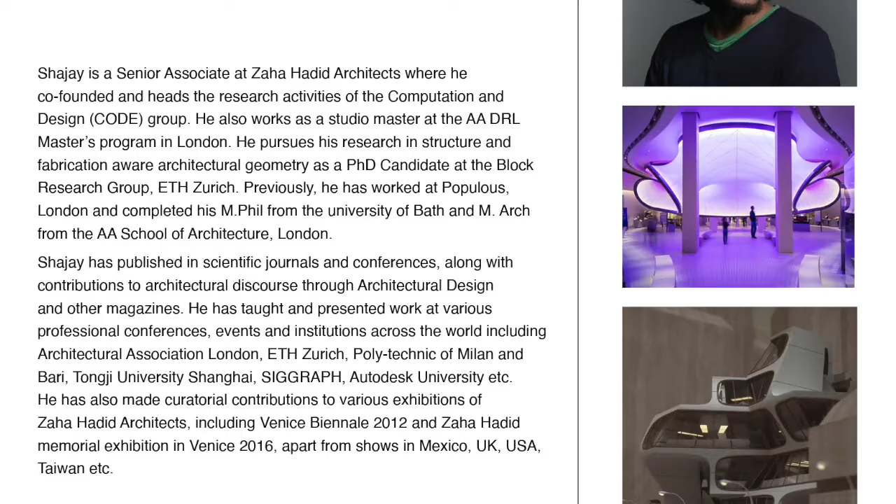Now to introduce our next speakers, multiple speakers. So one of the advantages of going to a virtual meeting actually has been that we're able to reach our speakers in a different way. And I think ZH Code, Zaha Hadid Architects, were the first to adapt to the new environment. When I was talking with Shajay about the presentation, he said, well, can I bring other team members in? And of course, that would not have been possible in the physical one with the setup that we had. So they are going to be presenting as a team.

And I think that's a perfect reflection of how we work. We work as a team. And when we have these conferences, we kind of spotlight one person in the team. We know we can't make it on our own. So it's a perfect example of how we work. We invited ZH Code because they are at the forefront of computational design. For those of you who are not familiar with what computational design means, you will become familiar after this talk.

Brad, in his presentation yesterday, touched on it as one of the drivers for the future, and how are we going to integrate that into our design process? How are we going to change how we make things, not just think about things? And how do we make it relevant to what we do? So I am very honored that they accepted our invitation and have taken it very seriously to explain what they do. I would like to welcome, I think Shajay is starting off.

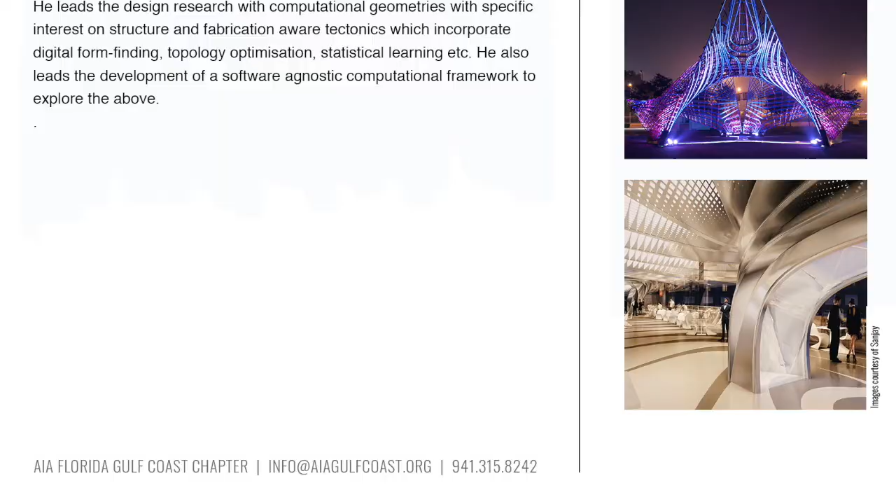Thanks a lot, Salma, for the introduction and also the invitation to speak at the conference and illustrate or outline the various efforts that are underway in the field of computational design, and how digital transformation in architecture is actually significantly underway. It's an exciting domain and also an exciting opportunity for architecture to reclaim its position as one of the leading technologically advanced professions.

And originally, when the conference was meant to be physical, we were excited to discover that Sarasota has a deep history in supporting experimentation, somewhat similar to the Bauhaus in Europe, and the Bauhaus has been a very instrumental reference for us at Zaha Hadid Architects, as you will see across the three presentations that we will make today.

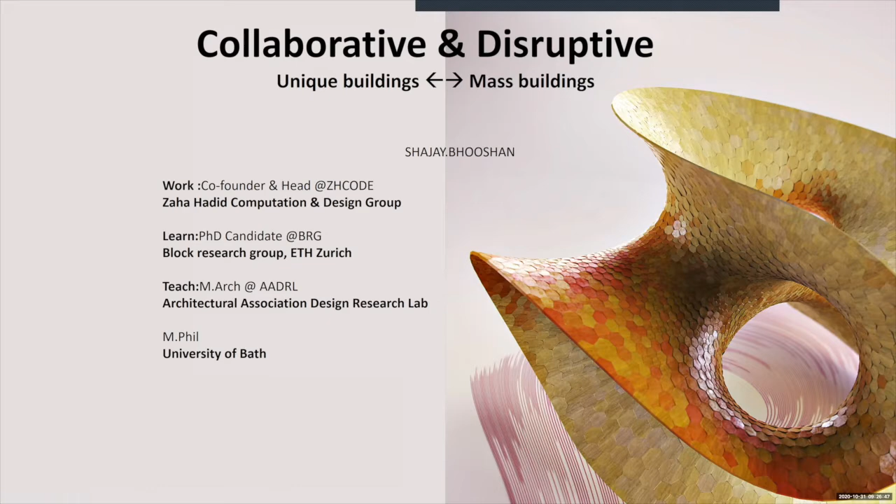So in that sense, where I work, where I learn, and where I teach has been kind of instrumental in both of these, and in trying to make this happen. And what we mean by this is to correlate research with practice, and computation and technological aspects with design.

And more graphically, what that means is, an equal part of our time is spent on exploring these fun algorithmic inventions from the world of computer graphics, from the world of computational geometry, etc., and trying to apply that to more architectural, let's say, problems like this facade design, which tries to put panels only where there's high curvature. Where things are flat, you use larger panels, for example.

And so this kind of approach helps us also automate and control quality all the way downstream. So even though it starts with a very playful experiment with maybe about 200 or 300 lines of code, it begins to yield results and fruit all the way downstream; it's trying to capture the constructional aspects ahead of time in the conception of shapes. So that's one of the applications of how computer graphics and so-called architectural geometry are intricately linked.

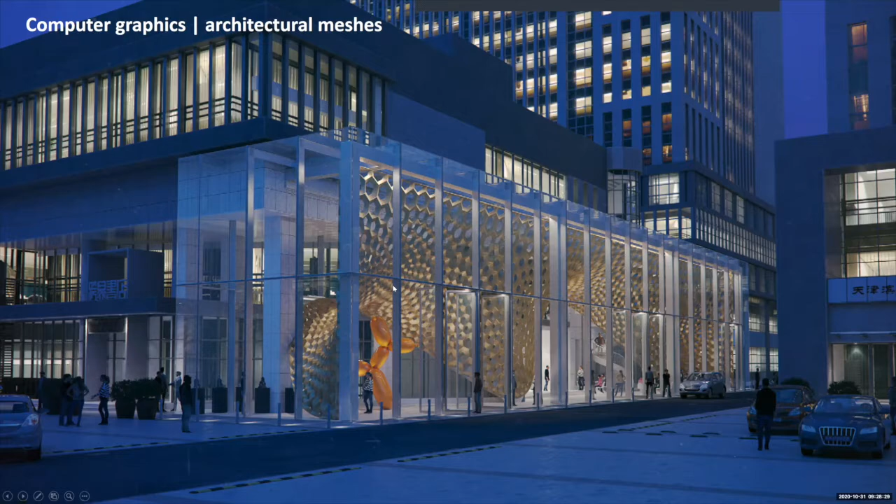And so too with robotics, which is a new domain in the field of architecture, maybe 15 years of keen interest, of trying to apply industrial robots from the automobile industry into the construction industry.

And so again, we start with simple experiments like this $25 robot, trying to instruct that and subsequently scale it to a slightly bigger robot, and then start designing a proper pen holder, and subsequently these things get more complex, and that allows us to scale to the point that we were then able to design specifically for robotic cutting.

And so all the geometries that you see here were produced by the robots at the back, and the shapes here, again, Henry and Vishu will articulate this in far greater detail. It's more that there is a direct correlation between the capacities of the robot and this geometry. So these shapes are not willfully drawn, but they're drawn specifically to match the constraints of what the robot can do. And you will see also that this significantly helps reduce manufacturing time and saves material and so on.

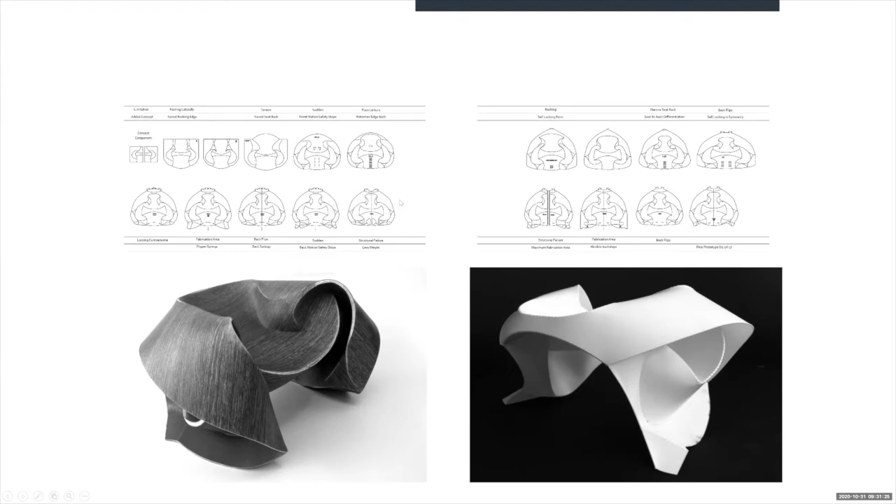And the other interesting thing about such topics is that there is a design method which is directly related to the method of making the object. So here we draw the patterns in 2D. We discover fold lines and draw them, and subsequently only fold them into this 3D shape. So the entire shape is made of one singular piece of paper in this case. So there's no gluing, joining, or any. So this shape will unfold into this singular piece of paper.

And what can be done in paper can also be scaled. This is another key principle of all of these experiments: similar to the robots, what you can do with a small robot, you can scale up. And similarly, what you can do with paper, you can scale to other sheet materials, which we did here. And anecdotally, what's interesting about this is that this was produced in India with hardly any digital economy at the time.

And it was also produced in just a few hours by folding metal by hand. We then subsequently tried to capture these intuitive aspects digitally. Until then, the whole design process was a physical process: just fold paper, draw on paper, and fold, etc.

And somewhere alongside, we were also scaling, making very large scale installations like this one for the Venice Biennale, which was not folded by hand, but folded by robots. But most of the intelligence was in the geometry. So the robots were themselves just automating some of the tasks.

And we bring a similar kind of thinking when we are thinking about new technologies such as 3D printing. In fact, as part of my PhD, I'm trying to explore the relationship between unreinforced masonry and 3D printing in concrete. And this analogy goes beyond the visual analogy. It goes far deeper, because masonry is compression dominant, meaning there is no steel or tensile capacity, and it's also orthotropic, meaning that you can shear away along these layers.

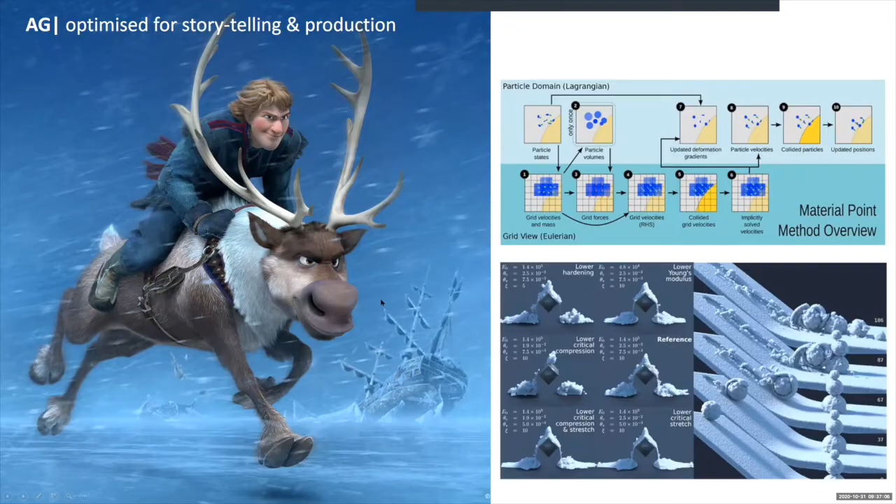Whereas behind the scenes, there are several PhDs worth of technology on how to simulate the snow, how to simulate the fur, and even how to simulate lighting and so on. So this kind of synergy between storytelling and technology, where technology really takes a backseat but is enabling the storytelling, is what we are really after. And again, even in the built environment, this is not very new.

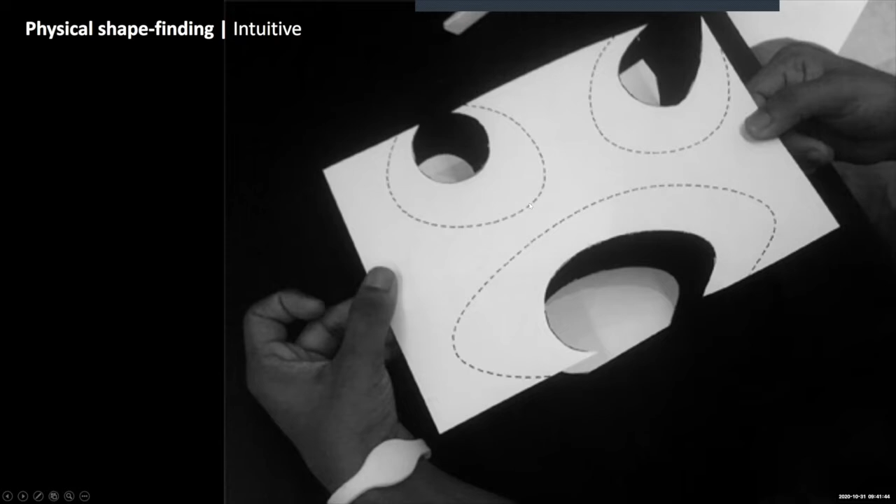More specifically, what we mean by architectural geometry is that physical and machine parameters are abstracted as geometric properties. Back to the origami example, in origami you cut material and score the paper, and then you fold by hand, and you get curvature for free, and the shape is an automatic result of the physical action. So this is a phenomenon of physics, where you're bending paper.

But when you try to do that on the computer, rather than recreate the physics, you try to capture the geometrical properties. In the flat plane, two conditions are true. All these squares and triangles will be flat, and also the angles at each of those so-called vertices, if you add them up, will add up to 360 degrees. So if you incorporate these two aspects, you make sure that things are foldable. The physics aspect is converted into two geometric properties, one of angles and the other of planarity.

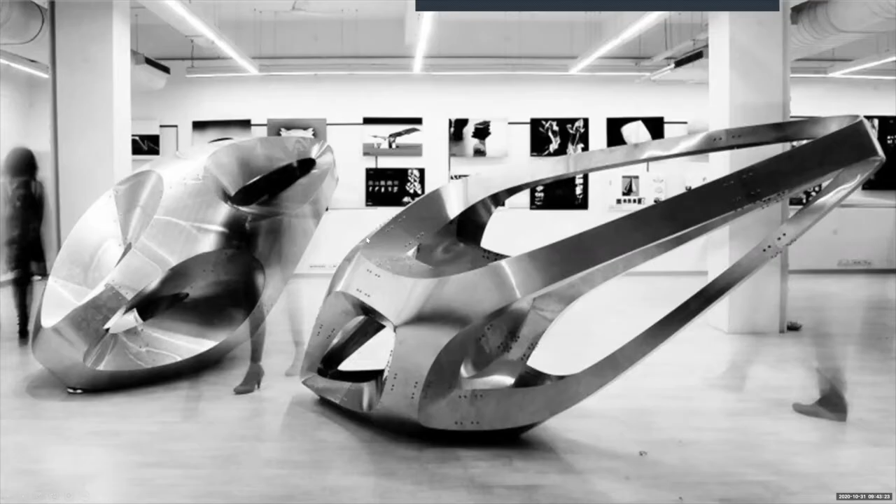And we move the points until such conditions are true. So you can see at the bottom that when the conditions are met, this particular shape is actually foldable. The benefits of making shapes foldable, for use as formwork and so on, you will see in Henry and Vishu's presentation. But in this case, we just made sculptures.

Again, without needing anything more than a simple laser cutter, which was available in India, because the person who had the laser cutting machine was using it to cut license plates. So we made a deal with that person. We exchanged some computational knowledge which would make their life easier, and they cut this for a cheaper price. And we were able to assemble these in a matter of a few hours in a relatively low-tech economy.

So architectural geometry, in our opinion, is significantly better because it captures several of these physical parameters: it's structurally, ecologically, and spatially better, and you will see how it's also helpful in the preservation of building traditions. What we mean by better is that it offers better degrees of freedom for designers. For example, in this tight space, we can create far more user experiences than if we were restricted to straight lines. We can create a somber mood on one side of this section and a more open mood, ambience and user experience on the other side.

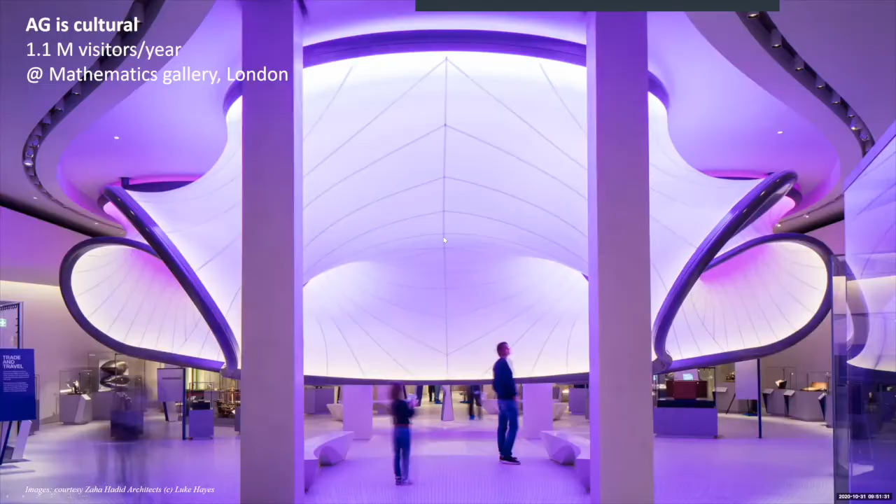And we have tried to extend this logic to schools in rural China, where we are using a different masonry technique, a different historic technique of stone vaulting, and trying to create various types of school spaces, like classes for primary, smaller children, larger, bigger children, aggregation spaces, and each one of them is kind of notated through the use of these textures and the size of the vault, etc.

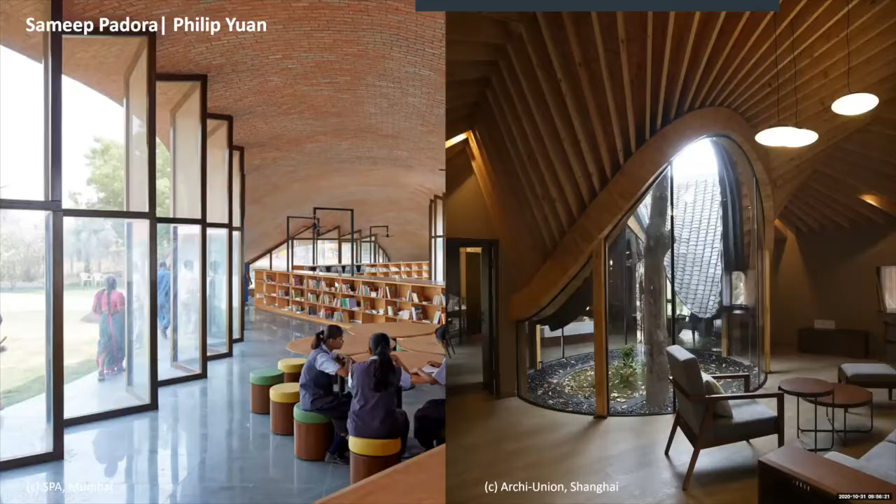But at the same time, similar logics are beginning to see extensive use in other building economies, like our colleague in India, Sameep Padora. He's been using similar techniques of stone, brick vaulting, etc., to design this library / school, which has sustainable benefits. It provides cooling, self-shading, because curvature is beneficial to have self-shading, given that 100% of the surface is never fully exposed to the sun. So some part of it is always under the shadow.

And similarly, Philip Yuan in China is producing these very intricate mixes between modern day robotic construction technologies of cutting timber, combining it with more traditional spatial motifs and also constructional techniques of shingling and so on. And what's interesting about Philip Yuan is that alongside Archi Union, which is his company, he also built Fab Union, which is a construction company which imports and develops robotic construction technology. So that's an interesting growth to see. They started small, and right now they're building very large hotels, etc.

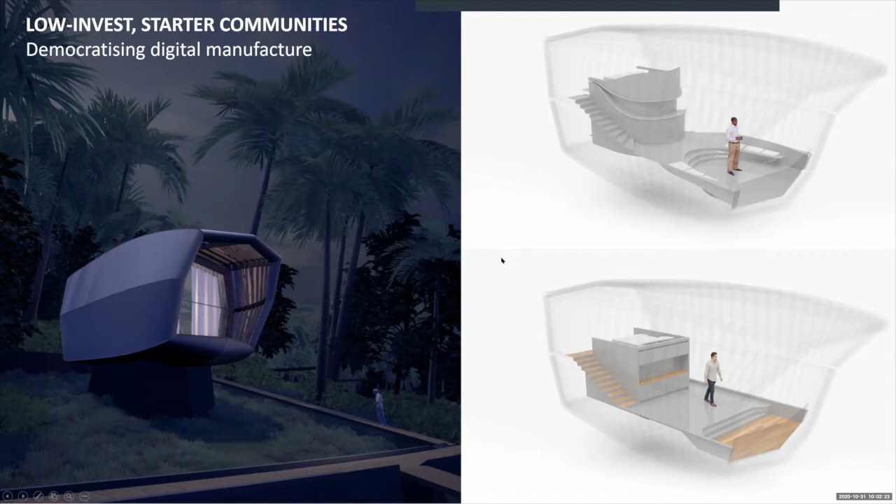Yeah, and then it also provides customization opportunities, right? So customization comes for free. Whether it's the top right image or the bottom right image, it probably consumes the same amount of machine time.

And other scale-up businesses, like this 3D printing sculpture that we had done with a London business called Ai Build, they're now a serious startup receiving investment from large companies. So they are making these technologies available to the extent that you can literally send a part over the internet and they can give you a price and ship it to you. That's what they're trying to do with this mold making technology. So you send a file, they will give you a quote, and you can order it literally over the internet.

And as I was saying, at least we are aware of these two big institutes in Europe. Presumably there are several others in the US and elsewhere investing significant amounts of human intellect, but also financial backing, into taking these new technologies that were experimented with in the last decade mainstream.

One example with ETH Zurich is this formwork technology, a lost formwork technology that we worked with them on to build this concrete shell called Knit Candela, as a homage to Felix Candela and his geometries. Again, Vishu will talk about these in greater detail. But what was interesting was that the entire formwork was knitted in Zurich and weighed only 55 kilos, and it was sent on a commercial flight as cabin luggage, and then subsequently hoisted, pulled over and tensioned, and then concrete was cast onto it. From start to finish, it was only 2.5 months.

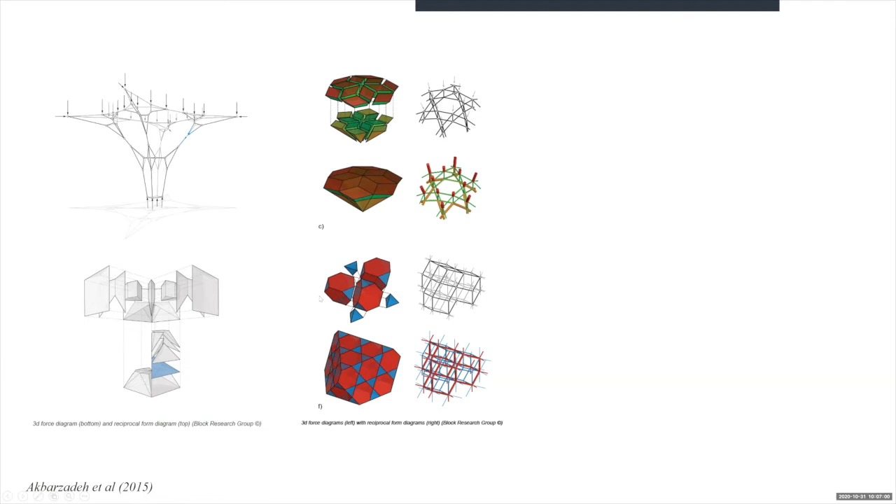So this piece of research literally unearthed theorems from James Maxwell in the 19th century and kind of upgraded that to understand the structural stability of these kind of skeletal structures, amongst other things. And what we found at ZHA Code in our research was that that structurally meaningful principle can be extended to also have some constructional information.

So for example, all of these complex joints can be made from flat timber sheets and flat metal sheets just by bending these hexagons. And again, these are just geometric principles that allow for not only structurally meaningful, structurally performing shapes, but also ensure that these can be manufactured or constructed using flat sheet material like this.

So the property helps that you can bend a sheet of ply, and then make very lightweight kind of formwork at least. And it also allows for a spatial extension, considering the spatial effects of these. So there is a lot of effort needed: you have to experiment design-wise, you have to experiment physical prototyping-wise, and you have to experiment in acquisition of knowledge.

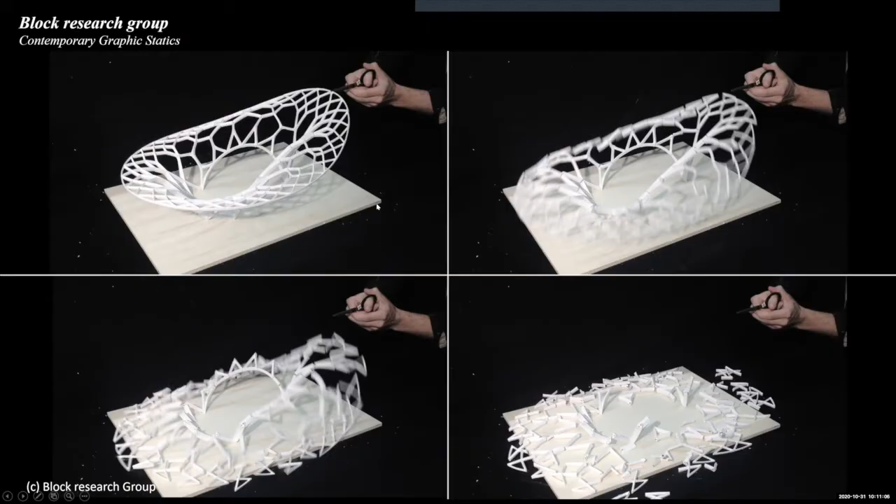Not only draw this, but also 3D print it, assemble the model and make it stable through the use of this red string. So there's no glue involved, right? So you cut that string and everything is going to come down. So how do you draw the geometry such that they're in this kind of structural balance? That was Philippe's PhD, which students were able to acquire in a matter of a week. And we were also then subsequently able to incorporate some of the findings from the workshop back into our software.

And now we are trying to extend those kinds of shapes through our own models, 3D print them, and you can see the cable there, not yet working. But we also physically made one such partial prototype, and eventually when it's complete, it should be something like that. So again, held together by a tension tie, everything else in compression.

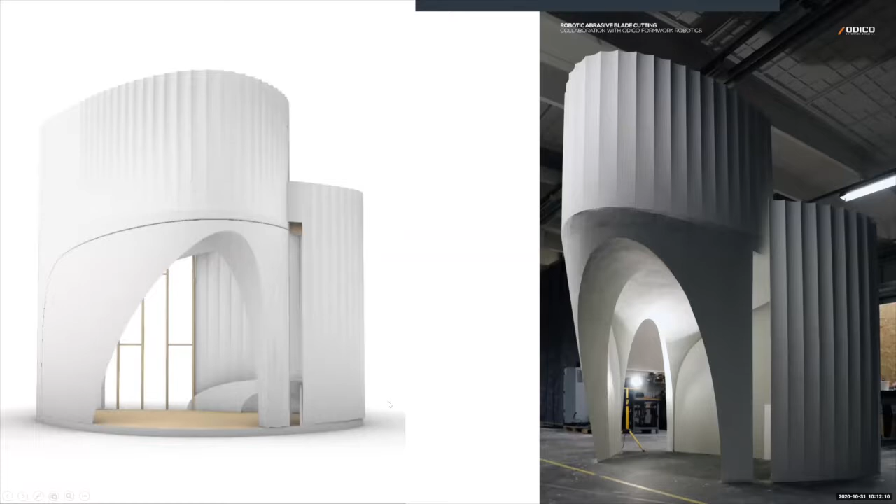So things are getting cheaper digitally, physically, and to the extent that students, in this kind of stakeholder participation game, were able to incorporate these kinds of novel geometries, which can be hot wire cut. Again, using these hot wire cut technologies, they were able to acquire the necessary knowledge to create the shape on the left, but also go to the factory, just 3 students, work with the robots and construct this proof of concept in a matter of 3 weeks.

So I will end there and leave it to Henry and Vishu to give you far greater details on how these are applied. But I would like to just end with this idea that architectural geometry, which is upgrading knowledge from several centuries ago through the use of computer graphics, computer geometry, computational technologies, is actually much better, and it is getting cheaper and becoming mainstream. So it's better structurally, it's better ecologically, it's better spatially,

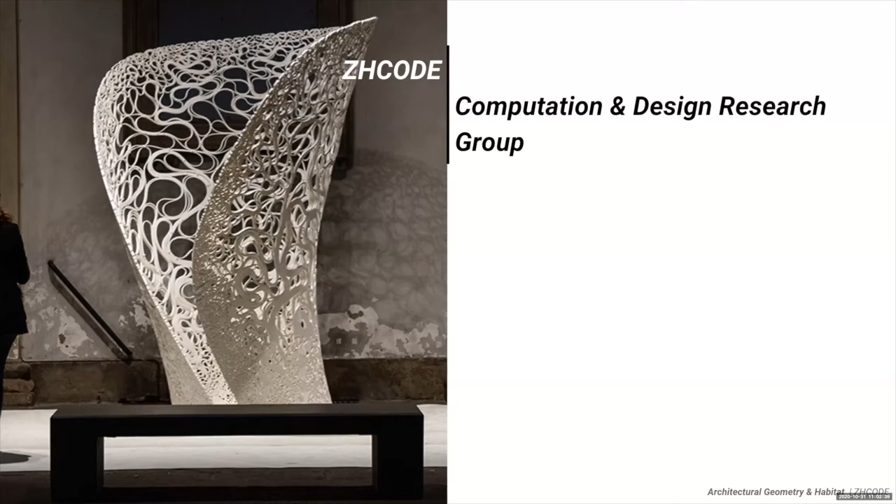Brief introduction into the group. ZH Code is Zaha Hadid Computation and Design Research Group. It was founded in 2007 by Shajay and Patrick Schumacher and Nils Fischer. In its existence over 13 years, since 2007, it aimed to create interdisciplinary collaborations through technology demonstrators, and subsequently getting more and more involved in projects.

Another mandate of the group was to have a wide range of collaborators we can call upon for different things, varying from 3D printing and robotics, data and machine learning, creative coding, manufacturing, engineering, etc., whilst also developing our associations with institutes such as Block Research Group and the Architectural Association, which Shajay already mentioned in his presentation. More recently, since 2018, we have an association at the Bartlett, and through visiting schools, we also develop networks in India, Mexico, China, etc.

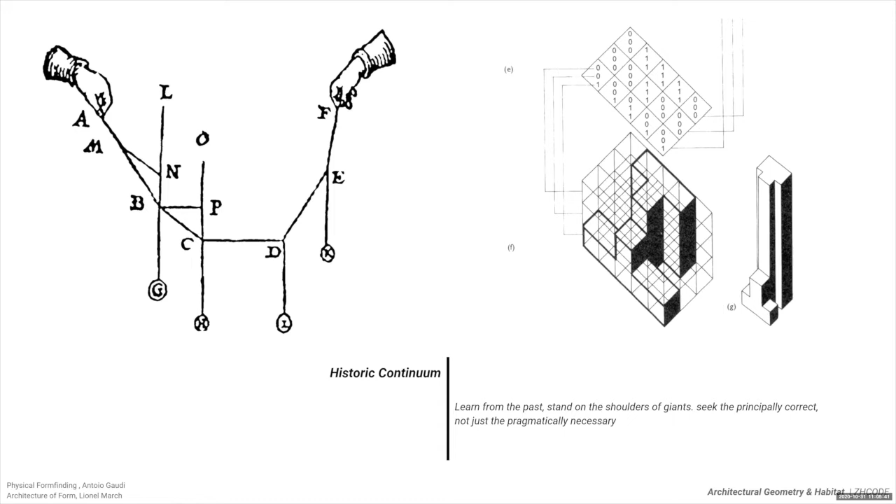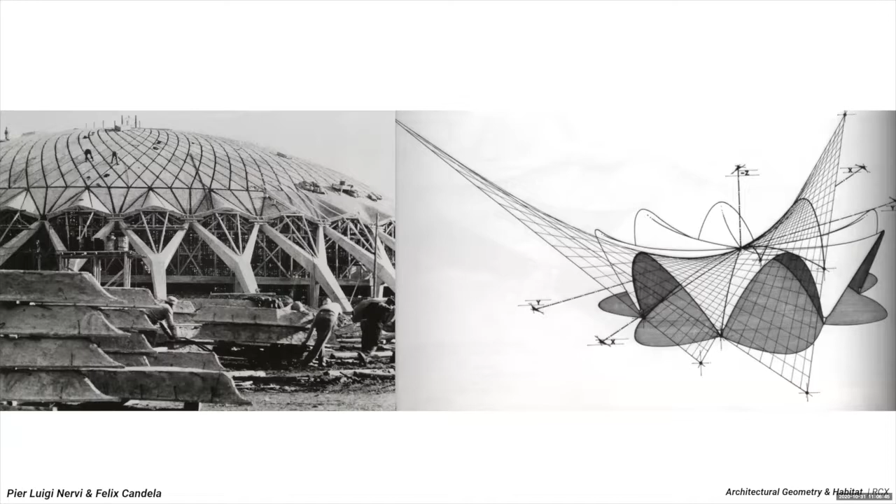And also other architect engineers such as Felix Candela on the right, who focused most of his entire work on a particular geometry called hyperbolic paraboloids, a specific subset of ruled surfaces. And Pier Luigi Nervi on the left here, bringing in not only geometry, but also rationality of construction and statics into the mix.

So learning from these historic figures, combined with maturing computation tool sets in the architectural industry through the Architectural Geometry book by Helmut Pottmann or computational statics frameworks by Block Research Group, Axel Kilian, etc., combined with other computational frameworks developed by geometry groups, again in TU Vienna, at ETH in the Interactive Geometry Lab, Keenan Crane at Carnegie Mellon, has matured the computational framework to bring it closer.

So we are now able to express statics, fabrication related constraints, environment constraints, and early stage shape design. And that is what is called architectural geometry, to make it visible in shape, structure, fabrication, and more recently, other performance factors like environmental performance, solar data, etc., into the shape design and influencing it.

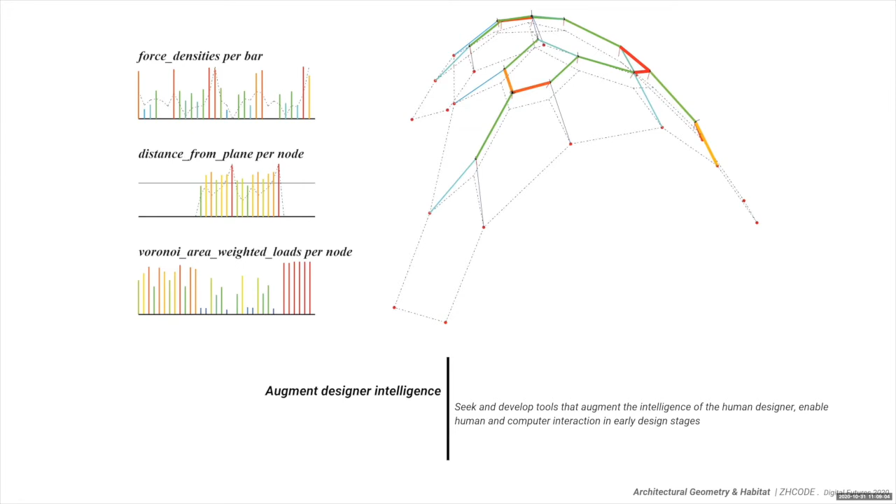The goal of the research in architectural geometry is to augment designer intelligence. It's not to replace the human, but to augment the human intelligence with these tool sets, so you're making an informed decision.

The first part of it is learning by doing, so the academic setup, how we carry out our research in an academic world. As previously mentioned, we have academic collaboration at the DRL and at the Bartlett, in the architectural computation as well as architectural design courses there. We have done 40 plus workshops over the years, where we try out different things in each of these workshops to develop our understanding in research of geometry.

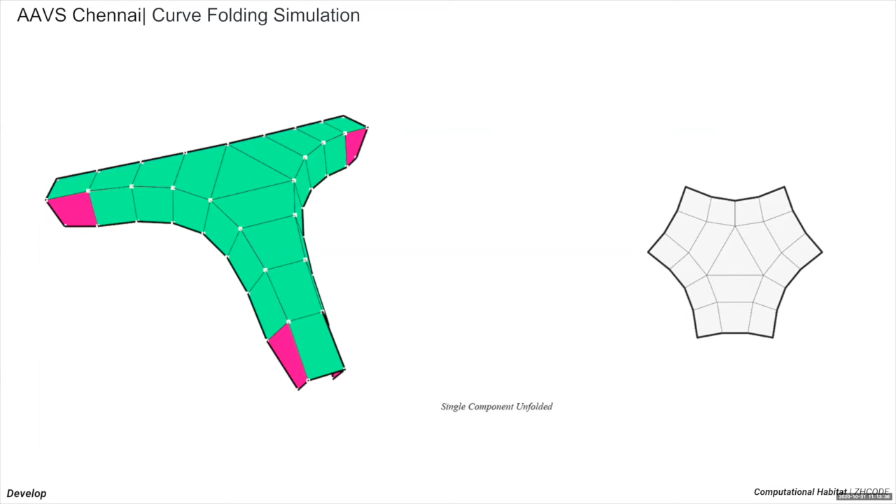So this is one of the ways that we also interface with the group, and also the rest of the office. There was a question about how design technology is transferred to the rest of the office: it is by transfer of these tool sets and the computational knowledge behind it.

So one is to understand the computational tool sets available out there to recreate this. And that's also part of the research through our teachings. We tried to get students to look for these papers and understand the technology behind it, and then use it in early stage design.

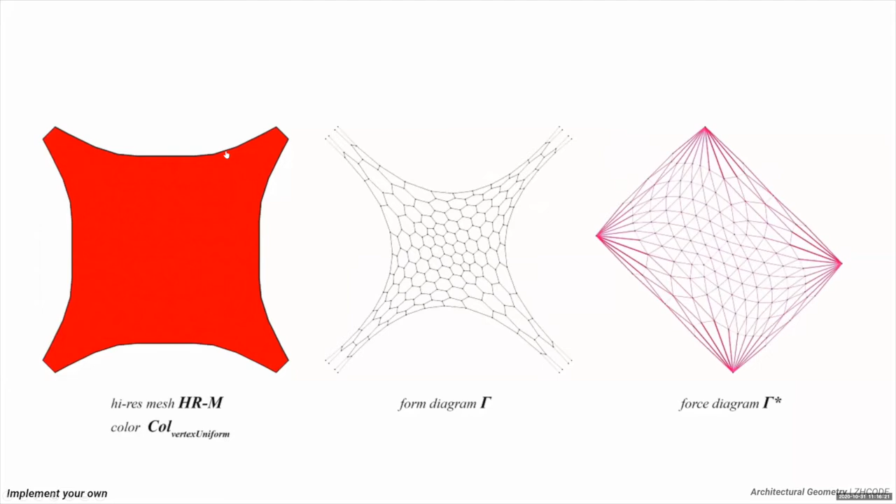So this is exploring the same idea of form and force diagrams, but in this case also inputting a designer constraint of, if I change the input geometry, how does the form and force diagram change, or developing an understanding of that. Once you have this understanding, you can build up the tool sets to integrate it into the designer environment. The office uses quite a lot of Maya.

So we try to integrate our tool sets in Maya so that the designers can interact with it and develop geometries, in this case funicular shapes, which are in compression, and developing an understanding between forces and the resultant geometrical shapes.

So once you have the tool sets, the next step is to use it in the design domain, try to build up structures. This was explored in a collaborative workshop with Block Research Group in Shanghai, where students were exploring polygonal modeling combined with graphic statics or thrust network analysis to build up geometries, and then subdividing them into panels or small blocks, which all stand through friction. And this is an example of one of them, trying to do a spiral staircase.

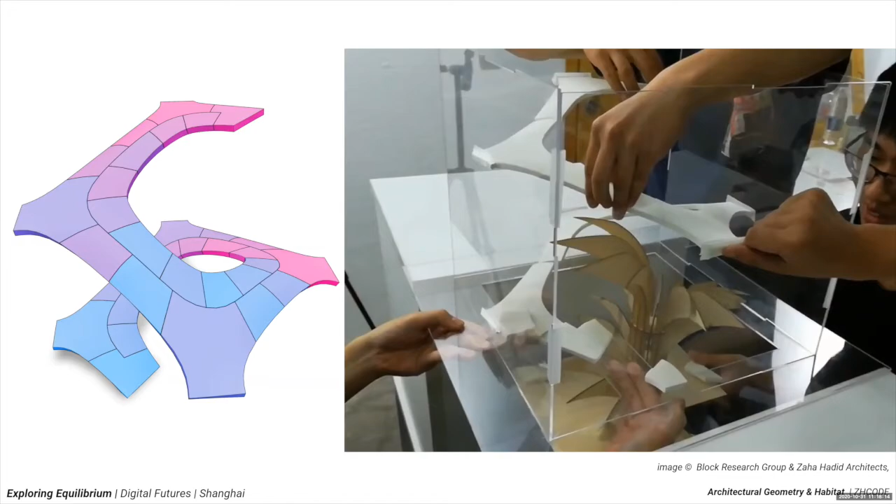The same logic applies to this geometry here as well. The whole structure is held together by this tension ring, which is a pink string on the top. If you cut it, all of it would collapse, like you saw in the previous video where the staircase collapsed while they were removing the scaffold. So these are the understandings we want to build through research and also inculcate into students to explore the design domain given by such a tool.

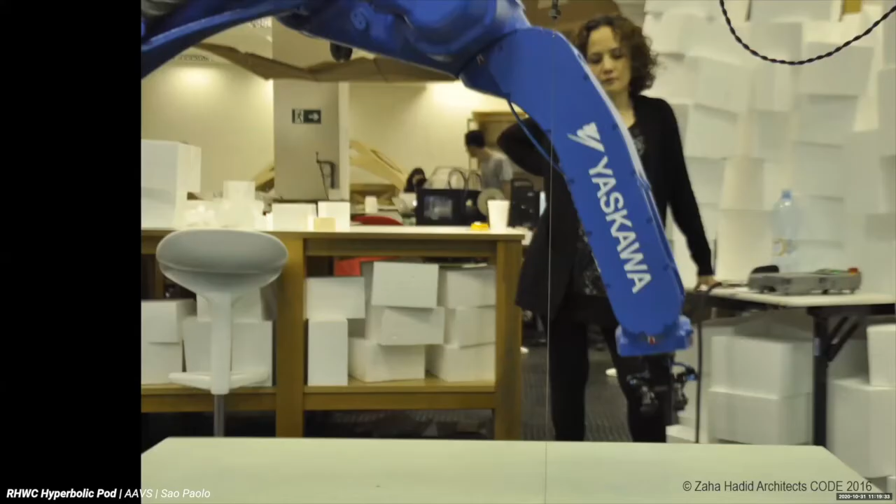Why is it needed to be planar? Because we wanted to make it out of hot wire cut foam blocks, which are easy to cut. So as you can see here, because all of them are planar cuts, you can just pass the foam through a string of hot wire and the block is made. And as you can see, this is almost real time. Each block takes about a minute or two to make. The overall structure had about 160 blocks, which were all produced in 3 to 4 hours of time.

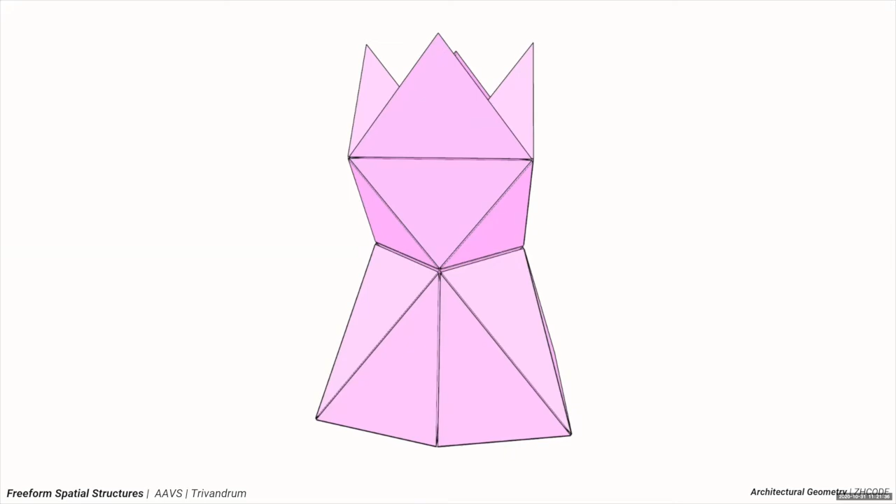Again, this has a structural influence from what is known as graphic statics. The shape is in compression, but our research here was to bring in fabricational rationality and explore the design domain provided by that. This was produced in India, where at that given time there was no laser cutter. So we had to adapt it to the local fabrication tech we had there. So a laser cutter was here replaced by 3 humans mapping out the cutting platform, one of them drawing the shape of the profile and then cutting it.

So there are tolerance issues. This is picked up in how it was assembled, because there was no labor involved. It was all students putting this together. The geometry, because it was bent metal, would take up the tolerance while we were building it up. And also the tolerance of fabrication was input into the design itself. So the metal, because it was going to be produced by humans, was scaled down a bit so we could adapt to that tolerance while constructing.

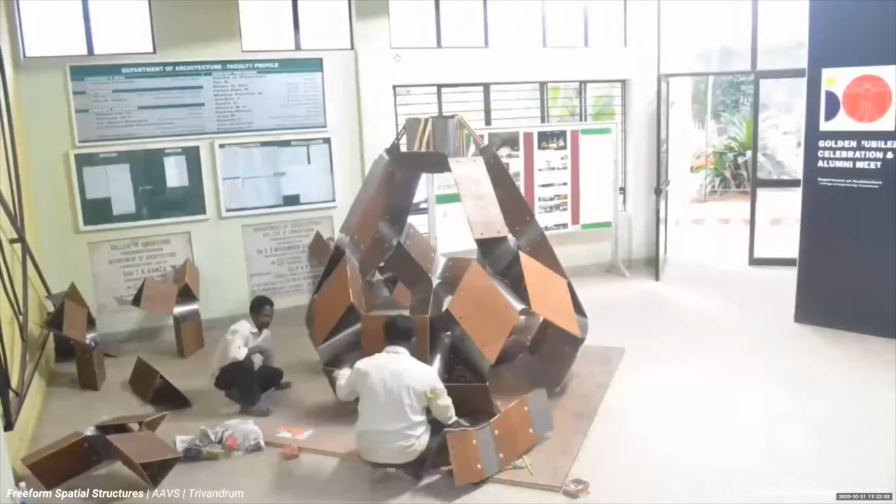Exploring the same logic further, in this case, we got rid of the metal connectors and built purely out of bent wood, exploring the same strategy of unrolling a given geometry into flat sheets, which can be laser cut. So you can see all the sheets unrolling into flat sheets. And in this case, because it was all made of timber, we had to explore a new connection logic of these kind of teeth connectors.

And this was the sequence of production. So you have a CNC cutting the profiles. They were then put in water to give the curvature needed to bend, and then we assemble one of the nodes. As you can see, it is quite light, and then locking them together with human winding and locking it together in place.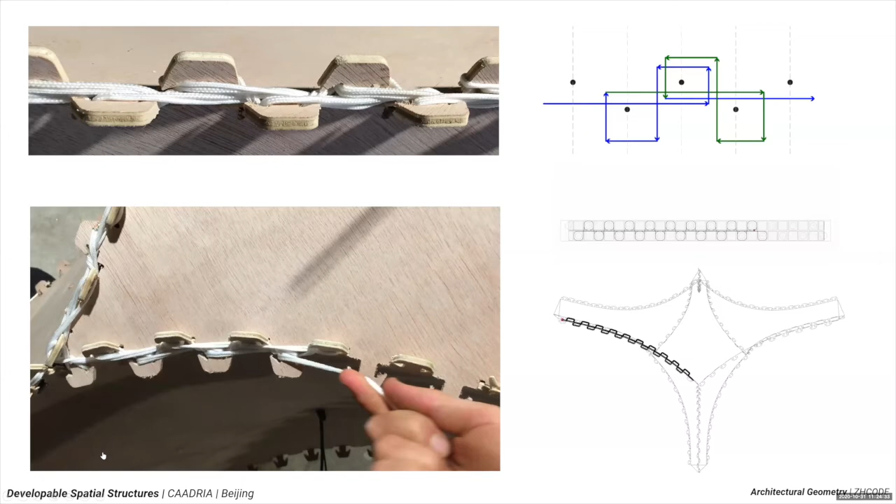This is another research domain we were exploring. We wanted to do this using robots, but to understand the logic of it, that's why you're seeing on the video on the left here that it was done by hand. So just to try to replicate what the robot would be needed to do to understand the logic and the sequence of this winding, and then subsequently develop the tool sets on the right.

So the digital representation when the workshop was done wasn't existing. It was done manually to understand the process, and then subsequently developing a computational tool set to explore it, and then eventually to try and make it with a robot.

Previously, we also mentioned a bit on the curve crease folding. This is applying that in a larger domain, in this case, a compressive shell. If it works on one Y module, as previously shown, it can work on an assembly of multiple panels. You're just scaling the computational time, but the logic remains the same. And as you can see, when everything becomes green, all of it can unroll into flat sheets. And that is how it was produced.

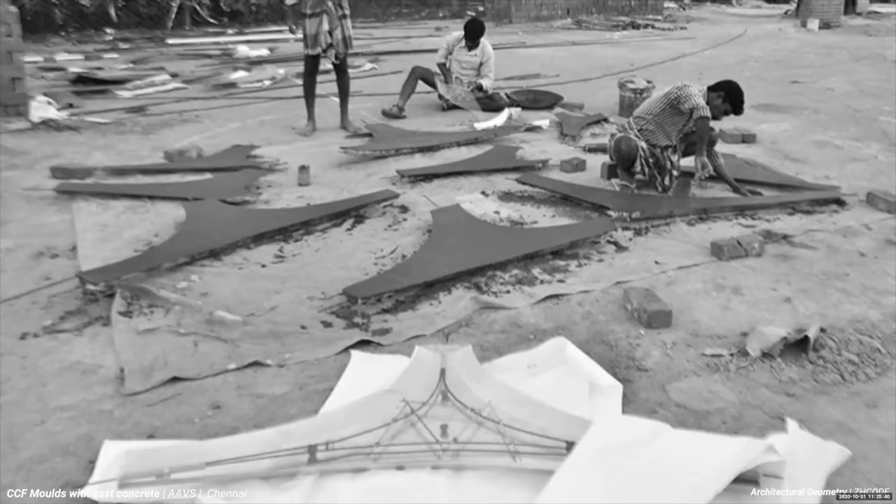So you unroll them, you cut, in this case it was metal, you cut them with a laser cutter, and then you bend them back into shape. Again, all of these were explored by the students. But in this case, these molds were becoming formwork for concrete. This is where we need skilled labor. Skilled labor was used to cast concrete onto these folded molds, and then assembled on site using metal connectors between panels, as you can see on the right. This is a work in progress of the shell structure.

Similarly, as you can see, the scale of application keeps increasing. We are kind of growing as we become more and more confident with the tool sets. This is another example of a shell structure in India, and a similar one at around the same time in Mexico. Again, all of these are through 10 to 12-day workshops. So the construction period is also very concise and very small.

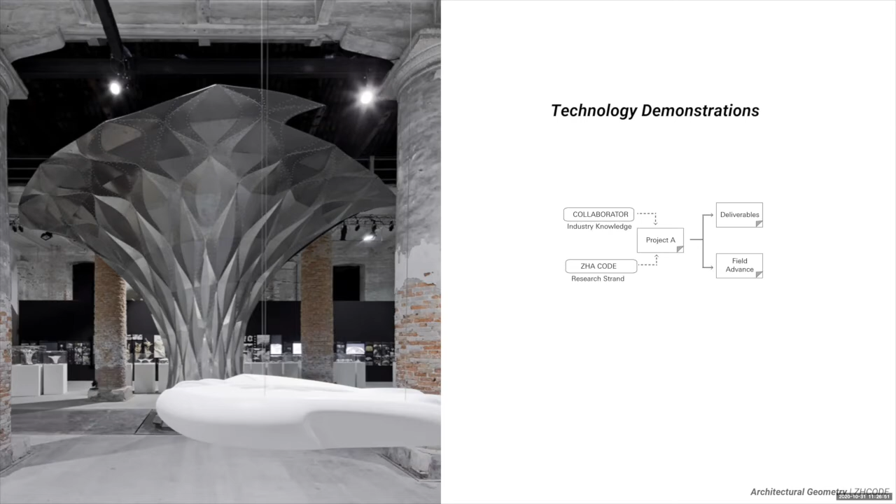This brings us to the second aspect of how we work within the group, which is to collaborate with technology collaborators. They bring in the technology, and we try to experiment through design how to explore and understand the technology. This can be through 3D printed technologies or high resolution 3D printing technologies, in this case for Stratasys. And the design domain here was for a chair. The technologies which were tested here were topology optimization in combination with high resolution 3D printing.

Again, in the scale of a chair, we were experimenting with stone, combining stone with carbon fiber. And here the material is actually performing: where stone is, the structure is predominantly in compression, and wherever you see carbon fiber, the structure is predominantly in tension. So this was in collaboration with New Fundamentals, Giuseppe and AKT, again exploring the tool sets we showed prior, like the Armadillo Vault, exploring compression tension shapes, and then highlighting them through tectonics of materials.

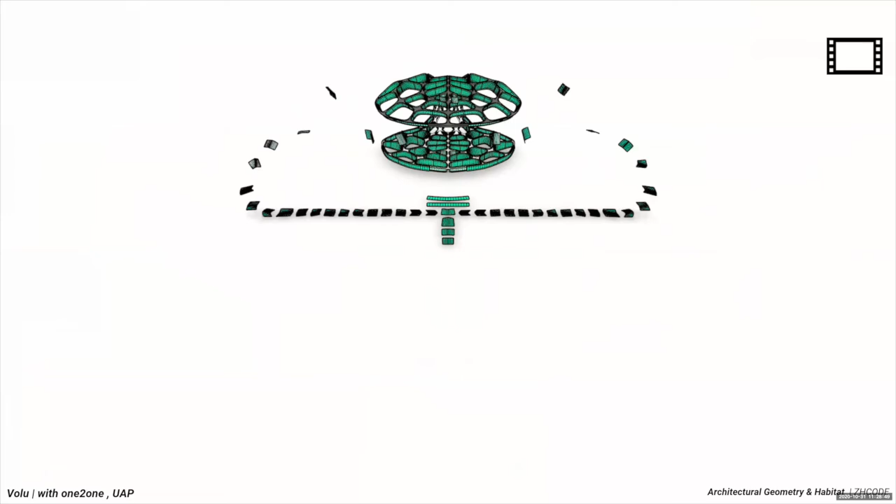Similar, another dining pavilion. Here it was a collaboration with one2one and UAP. There were two prototypes, the first one with one2one and the second with UAP. This was looking at frame structures, trying to minimize the torsion or making them planar. Again, as you can see, taking an input geometry and trying to rationalize it so that it can all be made up of developable surfaces. In this case, what we mean by developable surfaces is that it can be unrolled into flat sheets. So all of these loops, same logic as previously shown, unroll into flat sheets, so they can be cut with a laser cutter and quickly put back into shape.

This is a built prototype. This is the second version. It was a dining pavilion, exhibited in Miami Art Basel.

Another technology demonstrator, in this case in collaboration with AiBuild, a robotic 3D printing company, and Odico Formworks, who do robotic hot wire cut formworks. So because it was going to be printed with a robot, the design exploration here was differential growth of a curve, because the input to the robot eventually was going to be a curve. So we wanted to expand a single curve as much as possible in a given domain or a given shape, and a differential growth algorithm was adapted here to also correlate to structural performance.

As you can see, the density of the pattern is increased towards the boundary because that is where the high structural forces are, and the density of the pattern is reduced in the center of the geometry where there is less structural force action.

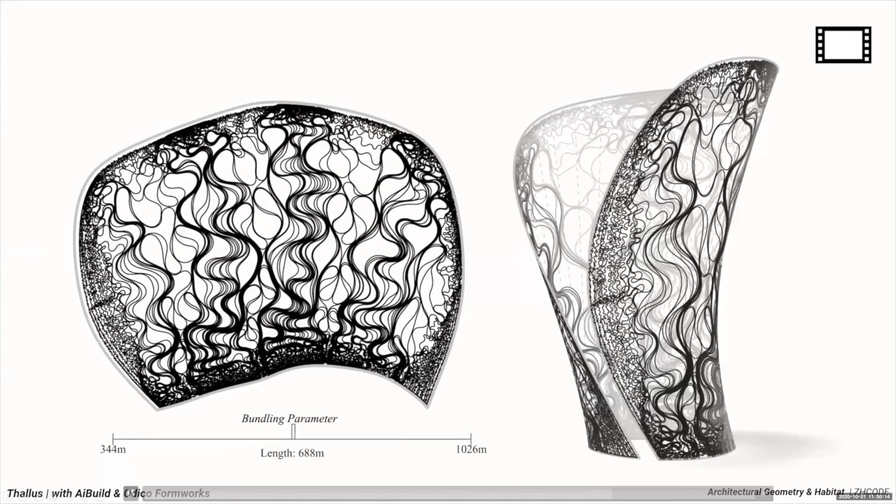Is the video repeating?

The second aspect of the project was to create the formwork on top of which the robot was going to print. The formwork here was done with hot wire cutting, and because it was a hot wire cut formwork, it had to be in the domain of what we call ruled surfaces. So in this case, if you cut a section through the geometry, it had to be made up of a line; that is a ruled surface. And then once you have the geometry in place, you can extract blocks which can be wire cut.

We have to also incorporate ideas of fabrication in here, trying to understand how the robot would print. In this case, looking at features of rotation. But as you can see, the block had to rotate multiple times. In the second instance of the pattern, it had to rotate incrementally. But eventually it was done in 3 parts. So the rotation of the robot and the formwork was slow and gradual, so the printing can adapt to it. So this was how it was printed.

And you will see in a bit the physical manifestation of it. So the formwork here is coated so that the plastic doesn't stick to it. And this is a bit of a close-up view of how the robot was printing on top of a wire cut form. So what you see on the right is the formwork, and on the left is the built prototype, which was split into 3 parts, so it could be shipped to Milan and assembled in an exhibition there.

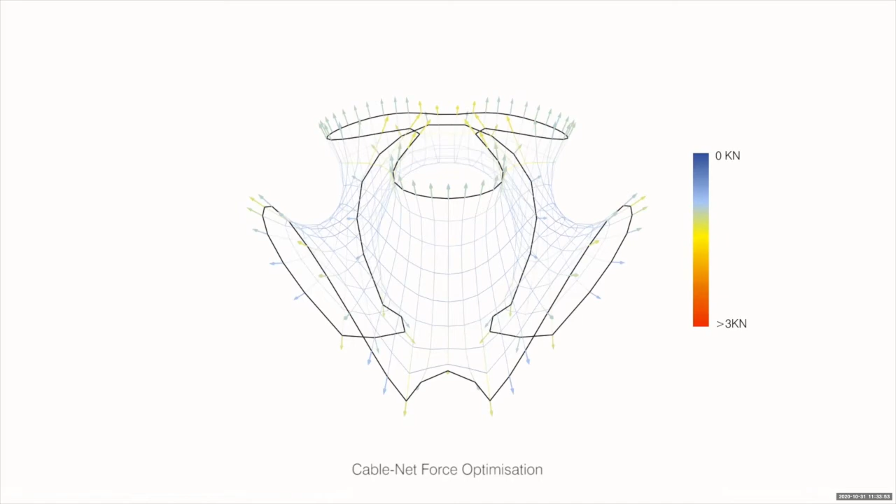So it's bringing together design technologies at Zaha Hadid Architects in London, combined with digital fabrication technologies at the Block Research Group, also inculcating structural performance into it, in combination with the artisan skills of the laborers in Mexico. So this video is highlighting how the design was developed and how the fabric, because it was fabric, had to be a minimal surface, and it was produced using a machine and the PhD project of Mariana, who was developing her PhD thesis on this fabric formwork.

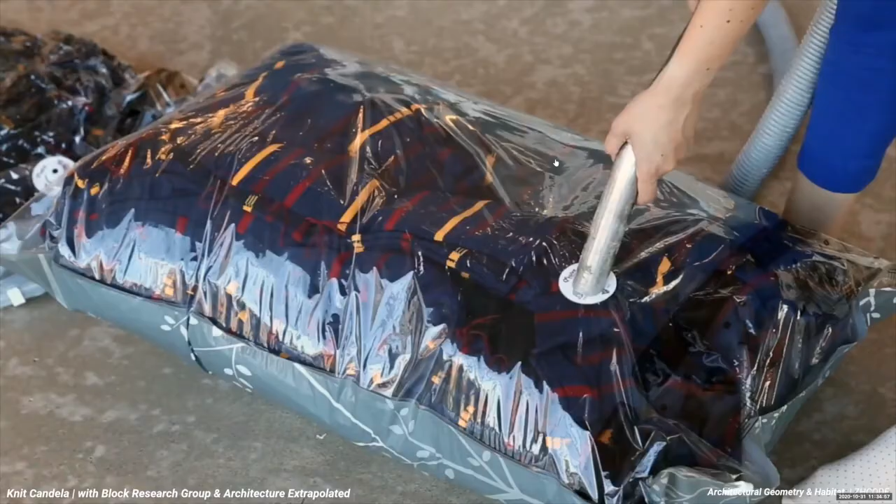The whole design to fabrication process was about 2.5 months, right from design to production. This is the machine which produced the formwork, which was packed into a backpack and shipped to Mexico. As you can see, this is Mariana on the left, and they took it in two backpacks, 55 kilos of fabric formwork, which was then unrolled and erected in Mexico.

Although, we needed a certain amount of false work just to hold the edge beams in place while we erected the fabric formwork. You can see a cable net was inserted into it to give the right tension. And you will see in a second how the whole of the fabric was pulled into shape to get the minimal surface. Just tensioning of the geometry.

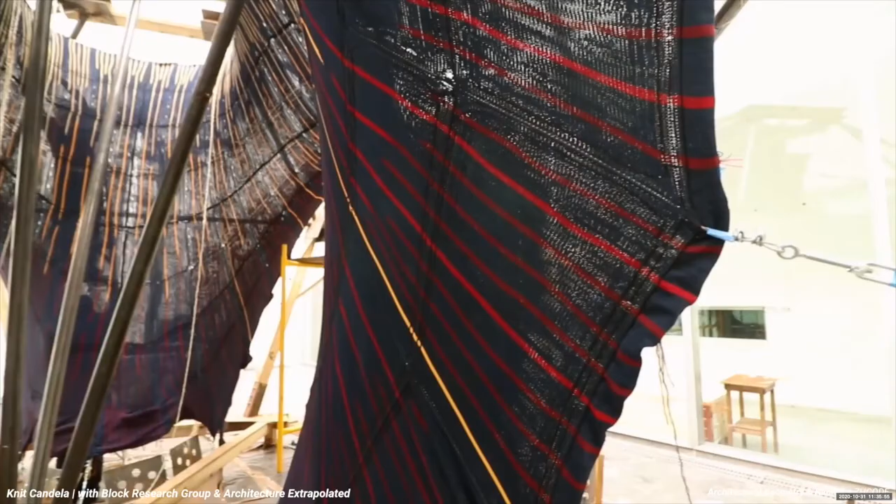There was an idea to reduce structural material as well, concrete. So in this case, there were balloons inserted in between the fabric voids, as you can see here, to reduce the weight. And then once the balloons were inserted, a special quick-setting concrete mix was used to stiffen the fabric. You can see that was the first coat, and then it was subsequently finished by the laborers and artisans in Mexico. The whole of this construction was about 1 to 2 weeks in the courtyard of MUAC in Mexico.

Some views of the technologies used in the project and the built project. In this case, the formwork is lost. It becomes an expression of the design of the sculpture here. All the lines here, the patterns, were also expressing the force lines in the geometry.

Through these technology demonstrators and our research in academia, we also are building up a computational framework, which we keep adding to. Everyone in the group has an understanding of code, and everyone also writes code. We favor first principles to understand and develop code.

So as you can see, this is Philippe Block's thrust network analysis. It gets compressed into 3 to 4 lines of code, which is exposed to the user. But to understand the first principles, each of these, you have to expand it into about 200 lines of code.

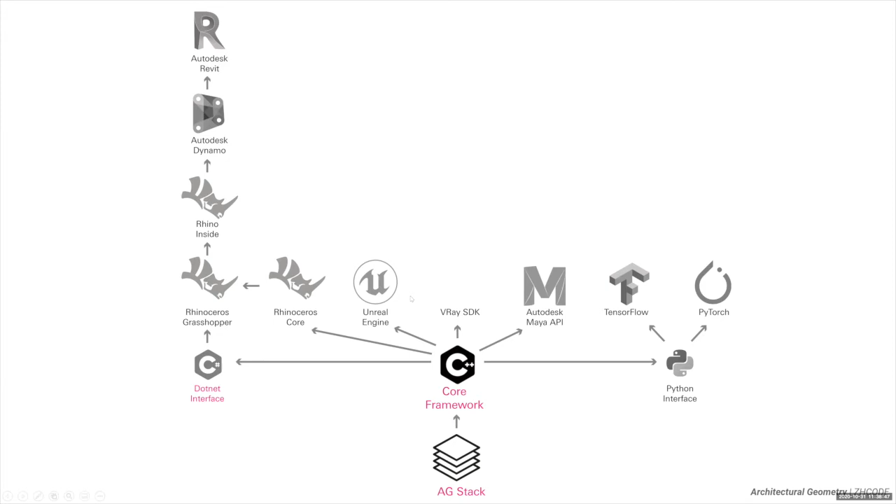Some of the tool sets, I'm not getting into detail here on fabrication. This is looking at graphic statics, and then also robots and inverse kinematic chains. So at an early design stage, you have the feedback of whether the geometry is feasible to produce with a hot wire cutter or 3D printing, etc. We also have to develop tools to interop between software, going from Maya to Rhino or Revit. So this is another aspect of the framework and technology we need to develop within the group.

More recently, we have also been looking at incorporating environmental performance, in this case, solar analysis. But as we are interested in early stage design, we want it to be very quick. Generally, these calculations take a lot of time, but we are interested in an 80% solution. That means trying to inform at an early stage with fast approximations. So you're already in a domain. While exploring design, it needs to be quick feedback.

So that's why in this case, for the solar analysis, we have adapted a tool to give quick feedback. So it's almost real time while the designer is changing or updating the geometry on the left. You're understanding what is the cumulative radiation throughout the year. These are fast approximations. It can be made more accurate in later stage design. But when you're looking at conceptual stage, even an 80% accurate model is good enough.

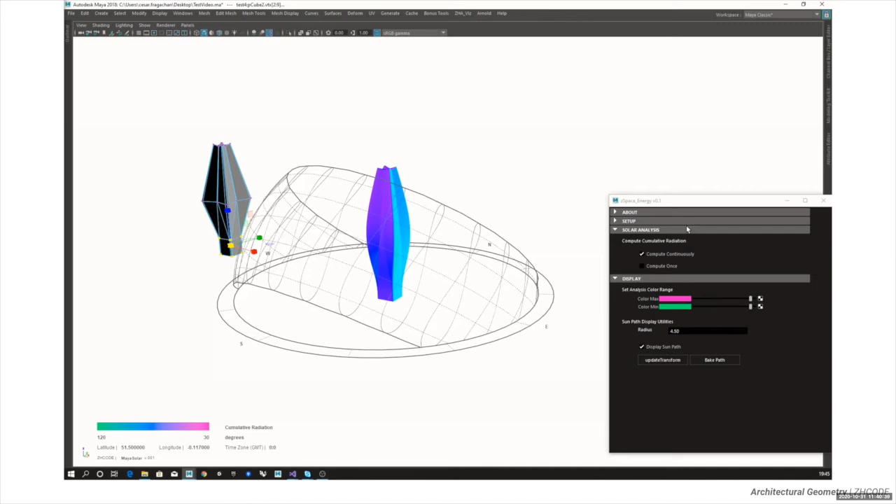Through the development of all of these computational frameworks and research in understanding of technology, we are now seeing applications of these in large-scale projects within the office, be it in museums and galleries or stadiums and arenas. We are also doing metro stations. Similar frameworks are also used in master plans, office buildings, etc. I'll give a few examples of a couple of them.

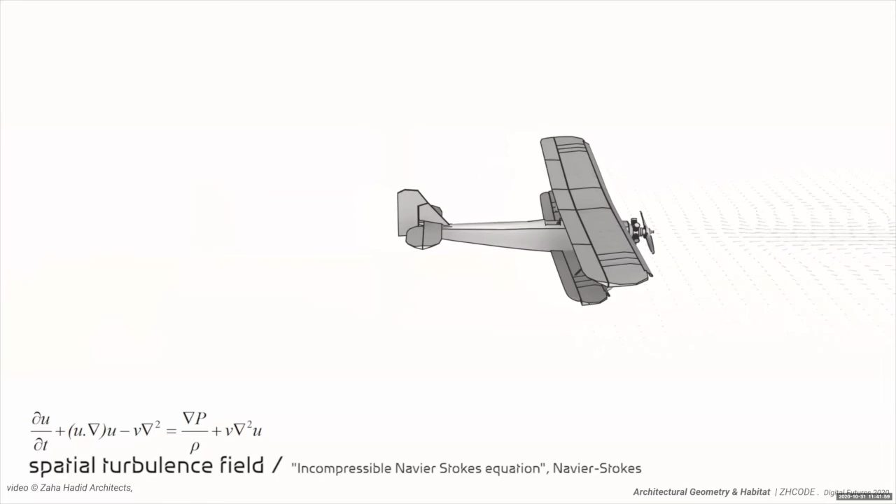This is the Mathematics Gallery at the Science Museum in London, where we were exploring the domains of lightweight structures, how to organize the space, and the robotically hot-wire cut concrete benches. So the concept of the gallery, based on understanding from the curator, was to place this Handley Page aircraft in the center of the gallery. So we were using simulations of airflow around it to be the guiding principle for the gallery. So all the objects, all the circulation and space planning was based around this flow field you're seeing in pink here.

You can see the first step was to develop a curatorial set in conjunction with the curator, who wanted to showcase application of mathematics in day-to-day life. And he wanted to explain it through stories. Each line is a story here, and each line has about 10 to 12 objects. As it was a collaborative setup, the object list kept changing over the period, and we had to set up a computational tool set which adapted to the changing object list and the changing location of stories.

As you can see through this animation, the stories kept changing, the location in the gallery kept changing. So it had to be a flexible way. We needed to come up with a tool set which allowed for that flexibility. The central piece, which was initially trying to capture the flow field behind the plane, was a minimal surface. Again, here extending the design history of Frei Otto's soap bubble experiments, physical form finding, but now through computational tools.

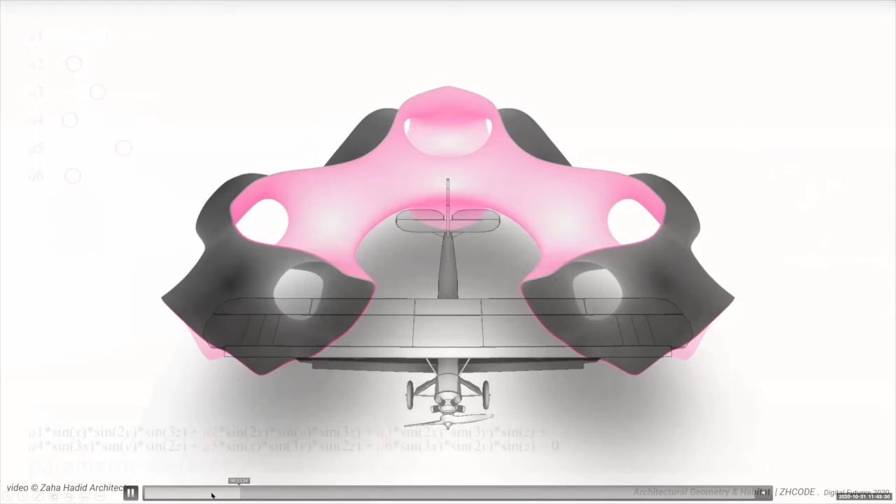Using the computational method, you can try. First, we were exploring minimal surface, which was given by equation, and then subsequently rationalized to be actually built with fabric and edge pipe, which was made up of metal. So these were some of the tool sets which were developed for the project. So you can see eventually it was built in 3 parts, so 3 objects.

So we make small scale prototypes within the group to understand the fabric and seam layout, the geometry you can see on the right. And understanding of all the built prototypes which we had through our technology demonstrators and through workshops gave us an insight to kind of push the manufacturing or the engineering aspects here.

As you can see on the left side is the conceptual geometry. And the first instance of what we received back from the engineers was a triangulated geometry and the loss of curvature. But because of our experience in building the prototype on the right, but also additional knowledge we had built through prior prototypes, we were able to push back and negotiate with the engineers to push the geometry to be somewhere in between what was given by the engineers and what was the design intent.

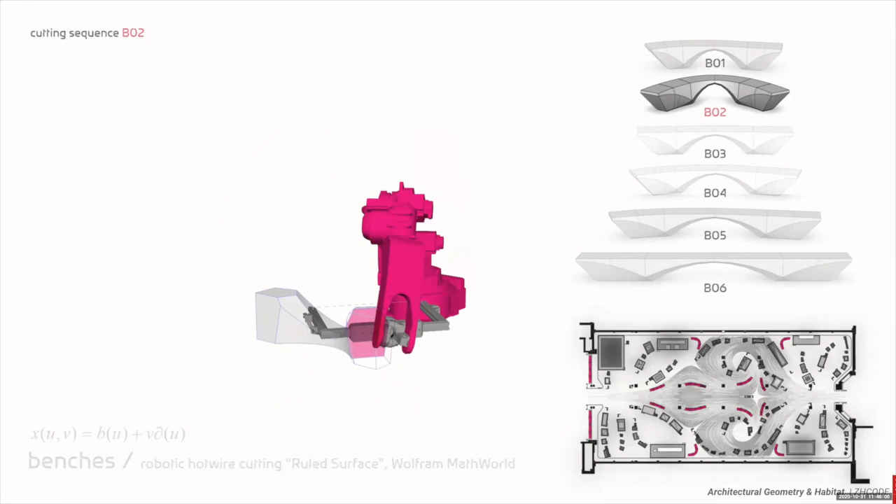The third aspect of the feature set in there was these hot wire concrete benches. Because it was to be cut with a robot and with a wire, it was exploring geometry in the domain of ruled surfaces. So you can see how a block is cut away to create the geometry. So there were 16 benches.

Because of the technology of hot wire cutting, each formwork took about 3 to 4 minutes to cut. Each of them could be unique. So there were 6 types, but all the 16 benches were unique because of the technology we were using. It didn't matter to the robot; the construction time or the production time didn't change, as the principle was more important than the actual geometry being similar. So this is the built prototype.

Once the formwork was built, it was cast in high performance concrete. It's about 2 to 3 centimeters thick. So this also helped in saving material. So the formwork is actually inside this, which made the whole block very light, and it was shipped into London from Odense and assembled on site in three parts. So if required, this can be disassembled. You can split them back into 3 parts and take it elsewhere.

This is another recent project we have been involved in. This project in Xi'an is a football stadium where we are applying the same understanding of architectural geometry to large span roofs and facade systems. It was a competition in March. It's a 60,000 seater stadium, to hold the Asia Cup in 2023. It's getting into construction. The basement is already under construction, but the architectural structure would go into construction early next year.

All you see here is actually terracotta tiles. So breaking up these geometries into panels which are feasible to produce is where architectural geometry technologies were used. Another application was to find these cable net roof structures, in negotiation with the engineers. This was an early stage competition, but now, in collaboration with the engineers and our tool sets, we are able to make this cable net even thinner and get rid of the truss in the middle.

So in the same way that we were looking at the soap bubble of the Science Museum by making digital approximations and physical approximations, there's an emphasis in the group on making in both worlds, both analog and digital, because it allows us to see things from a lot of different perspectives. It allows us to test things. It allows us to fail.

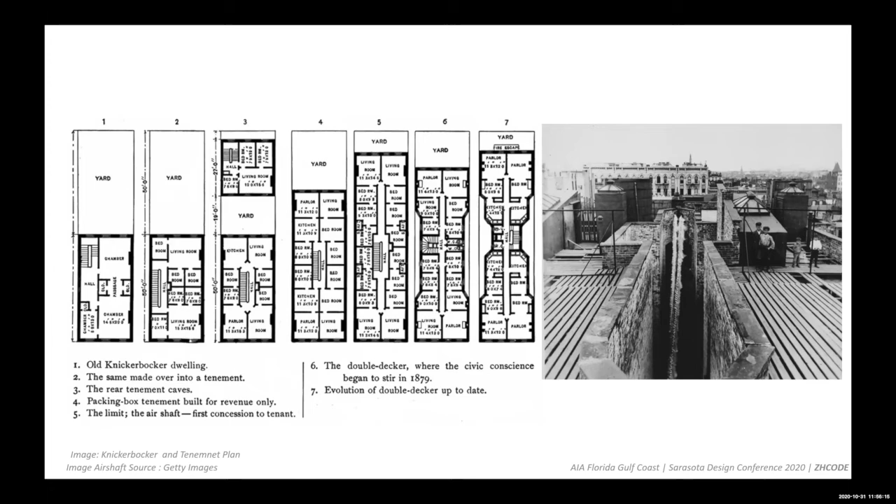So, in COVID times, we know this is like a terrible thing. We knew it was terrible before COVID, but nonetheless, often this is sort of a default condition. This is what we are going to avoid, is efficiency. What we want is effective housing, and effective housing means slightly different themes that we have to take on.

And there are also concepts of how we activate the social realm, which is the part of housing that is most known for or infamous for, in the sense that the public domain needs to be activated in multiple ways, both spatially and operationally, to make them effective.

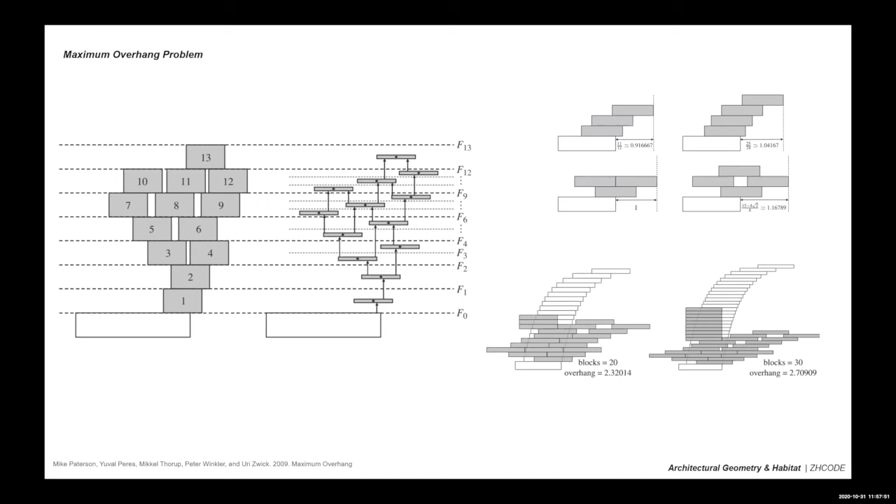There are other things that we're interested in too as a group in computation, and thinking about first principles in physics and rigid body physics and the stacking of things and how stresses transfer, and if we were to do something which is low rise or that has a cellular nature, how that can be used to have minimal footprints but still have maximum projection, so to get the least impact on the ground with the most impact in the air. So these types of things we're trying to study.

We're interested as well in prefabrication and cellular and modular construction, and this is a case from Jean Prouvé entitled Maison Tropicale, which is seminal in the fact it has a very small mast that a very large canopy is erected over, and it's very light and delivered via airplane. Who wouldn't want their house delivered on an airplane? But

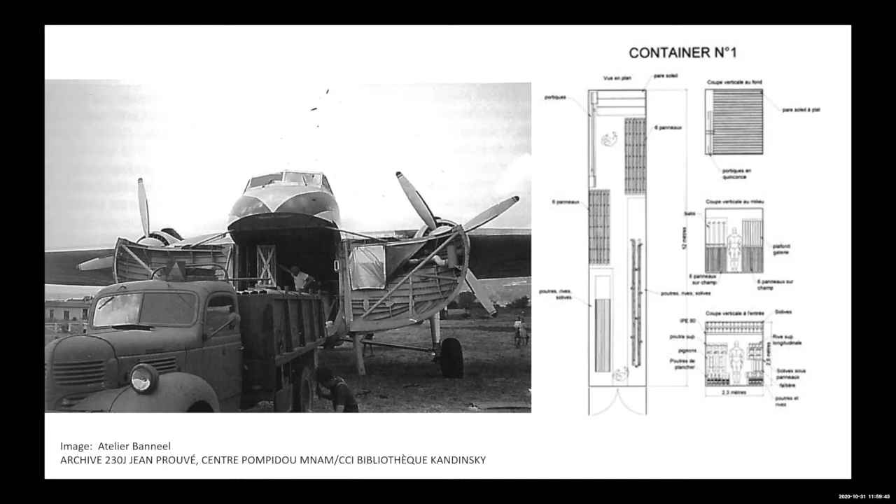nonetheless, it is starting to explore delivery systems in housing, in the same way we would see out of Buckminster Fuller doing the same thing, but for light skin structures and pulled stretched floors and tension, and how much does your building weigh.

There's also an emphasis in our work in how we're thinking about these things as products. As in, are there elements inside of them that can become cells of their own, in the way that we would see Buckminster Fuller again with patents for bathrooms and bathroom fixtures, starting to think about industrialization in the housing realm.

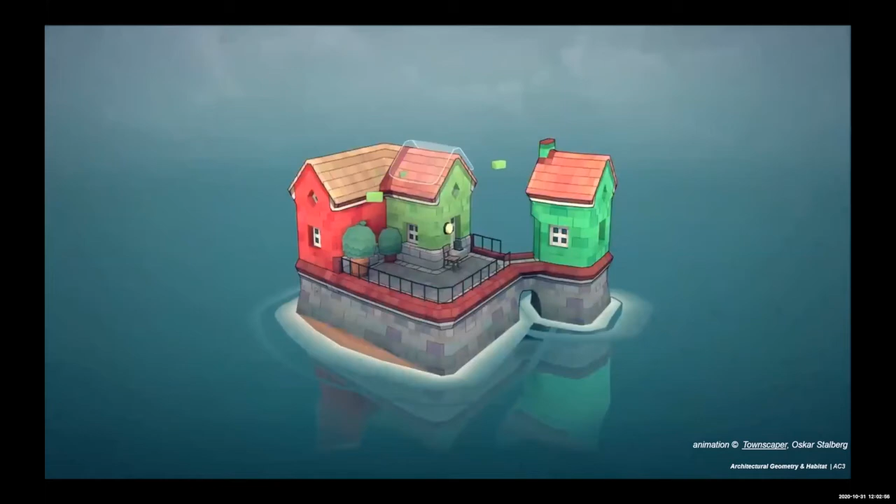And so our exploration is to start to think about how we exploit them. And so this is an animation called Townscaper, which is not in the computational sense a replication of elements, but is rather dynamically changing or adapting stylistically like elements to combine to make a composition. And I think this is where we're most interested.

So while computation and design as a research group has both parts to it, both the computation side and the design side, the design side often is seeking to exploit things or to explore things, or they may not have the right solution to break the computer, so to speak. And this is a good example of that: it may be difficult to see how all of these things might come from the same lineage, but nonetheless they are.

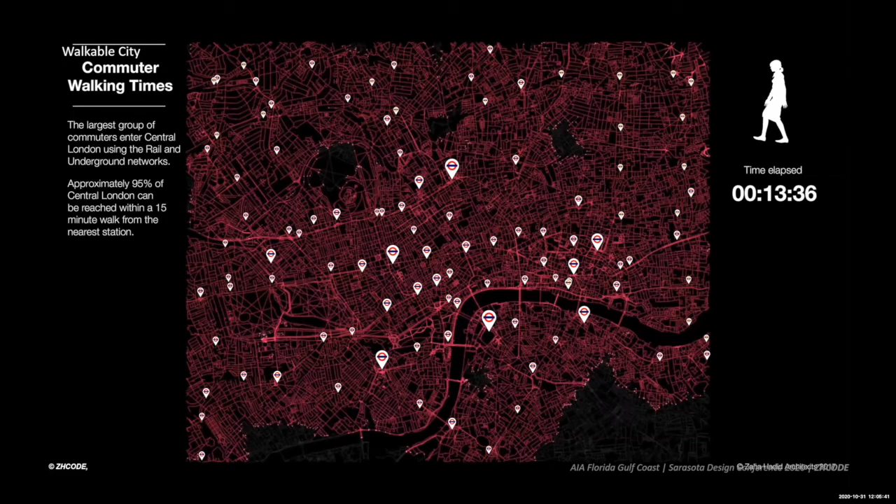More broadly speaking, the housing strategy that we've taken has broad citywide effects of trying to map where people live versus where they work and look at ways that we can densify areas that are maybe lacking in population density during the day. And so these are examples for walkable London, trying to find areas which are maybe cut off or islands from walking to transit that may be opportunistic for housing, and also looking for areas in direct proximity to the tube because they are more saleable in a sense.

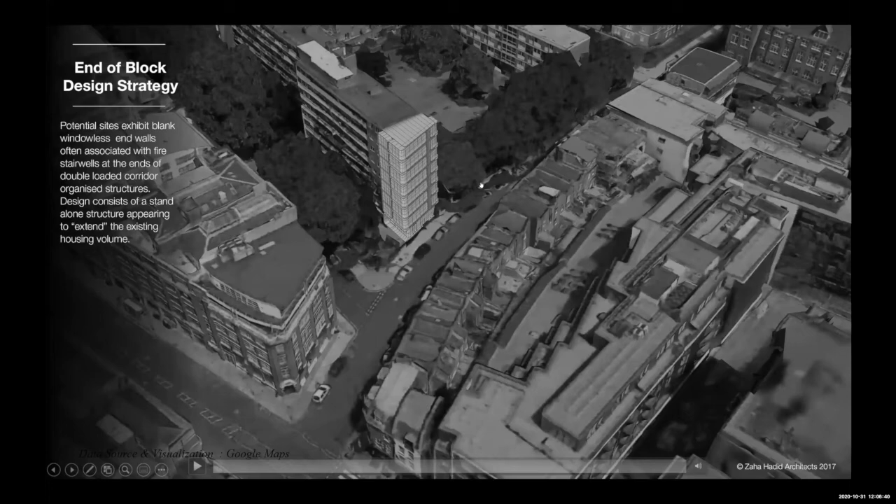This may be small 10, 15% bits of lot. In this case, we're looking at ends of estate blocks and trying to identify how many there would be in a city and how much that portfolio would be worth if we were to develop it. That's just one opportunistic way of looking at the city. So if there are ways that we can densify the city through a number of these opportunistic means, I'll switch this over again.

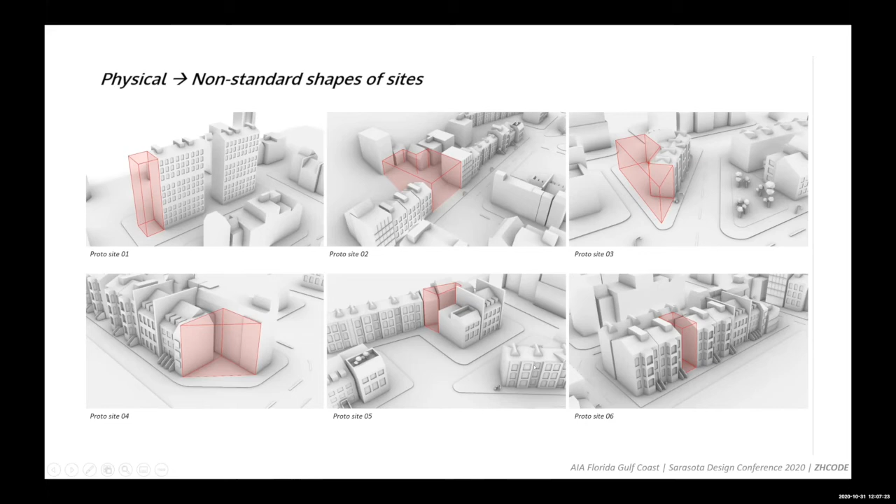So a lot of non-standard shapes, sizes, and sites. These are ways to think about how we exploit what is available within the city fabric. Okay, so where we left off, I was just finishing talking about some citywide initiatives to find sites, to be opportunistic, and to look at the city in a way that we can incrementally increase a portfolio of housing options in the total portfolio of housing possibilities.

So one of the strategies that we start looking at is we look at the amenities first. Where are we going to put the amenities? And what will the amenities be? And if the amenity in this case is just a void space or a terrace, then that already starts to give us nodes to link up space and to suggest how we might move the units around to allow for that to happen, which is a slightly different approach than the efficiency approach of let's put them as close as possible. But the amenity itself provides a sort of light well in this sense down into the space.

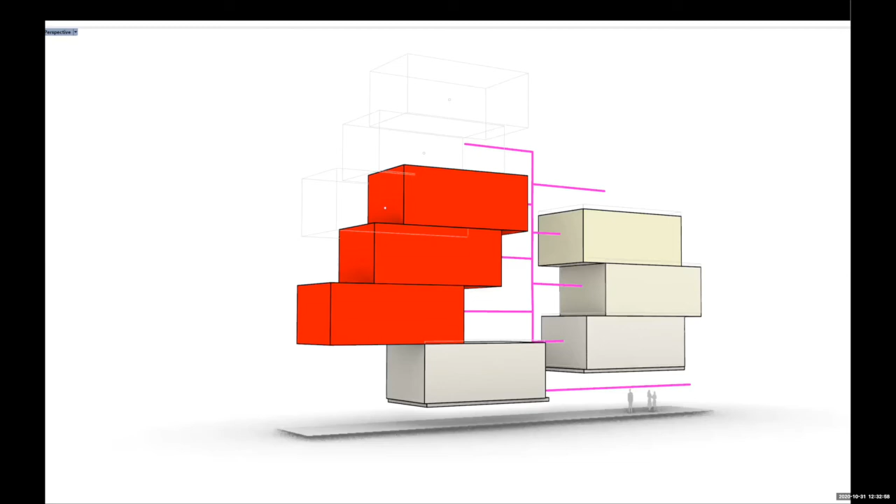So as a theme, this carries through with some additional modular construction thought in both the space planning for program and also the fit out. And as Vishu already mentioned earlier in his architectural geometry presentation, is the use of early intuitive non-engineering approaches to approximate equilibrium and to approximate self-stability, because it represents a state which would be less engineering obtuse. Here we're looking at the load that would be transferred between any pad. Notice that the lowest one is the most loaded, while the top one is the least loaded.

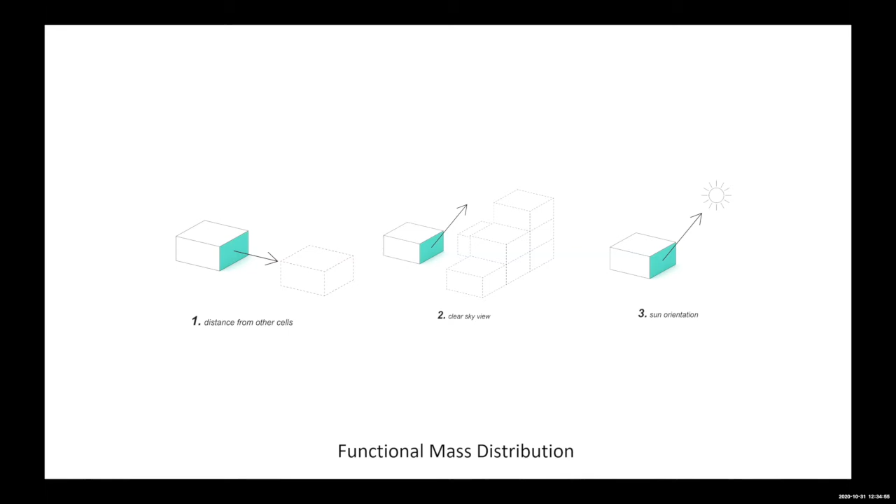So in this particular algorithm, it's basically plotting recursively. Each iteration, it is absorbing where the light would hit it to generate where the voxels would be in space, to arrive at a solution that has so many units that have enough light, as an erosive strategy on a given mass. And this is just a repeat from another vantage to give you a look at this. But that allows you to start to think about space very porously, but at the same time, this is still a very dense development.

If we were to do an efficiency calc on it, it would be very high. And fundamentally, the backbone of this is a double-loaded corridor, but it has a playfulness about the terraces and a playfulness about the removal of units to where it becomes less visible and blurs the boundary of what used to be a double-loaded thing versus now what looks like a field of units that have micro-terraces.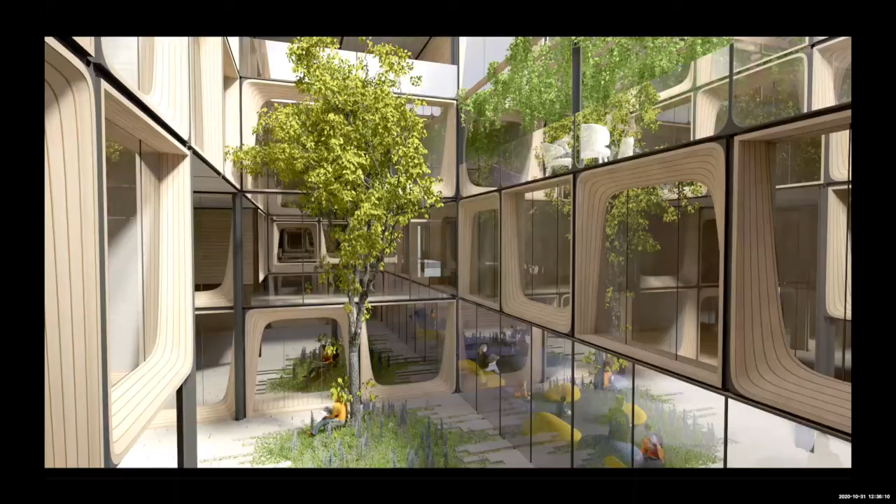So this one is set out to be micro-terrace friendly, and all of the units sort of sit around this. We first start suggesting in this one also like a kit of parts that there's a balcony that could be shared or that has multiple states that it could be. It could be no balcony, balcony, two balcony, this kind of thing. So sort of look at this from the inside.

Now this is maybe more towards, you know, young professionals or co-live or student housing. I mean, it is a tight sort of courtyard here, but to be able to offer additional residential and housing stock is what we're after. We're not trying to say all housing has to be this. Quite the opposite. What we're trying to say is that if there are opportunities to provide density, let's take that and do it. Let's get some more density where we can and sort of pick our battles. If we need to do a different product in a different location, we would do that. But what are the opportunities the city affords?

So that gets me to the next thing, is thinking about how small can we go? If we start thinking about micro housing or pocket living, what in sort of the Stanley Kubrick sense for people in film out there, like if we just open up the door and it is a clean room and all of the furniture is modal, like what would this look like in sort of a very contemporary, almost futuristic way? If we were to hide or mask everything and start to think of the room as just a living area and everything else is just a detail. Behind the wall perhaps, or in this case above the ceiling.

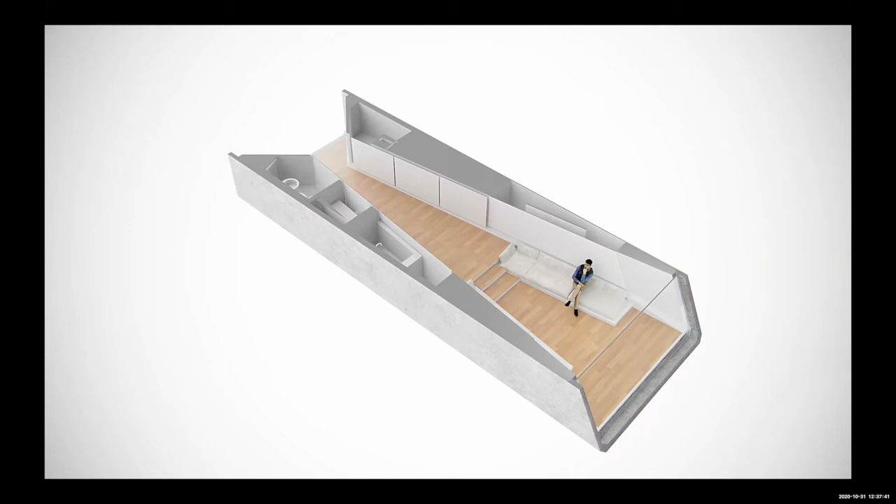So using the vignette of a thick wall to hide or pocket all of the particulars. In this case, the thickest part has the wet amenities at the back with drier things successively happening at the front, and a sunken sort of area for lounging or inviting a friend or two over. Let me see if this will play.

But to try to think about removing particular distractions in one's vantage as you get smaller and smaller of a space, trying to make it look less chaotic or to be more open becomes very important. What you don't want to do is have many, many things all over the wall when it becomes smaller, and then it feels very cramped or very cluttered. So the emphasis on the aperture or the emphasis on the windows in this case is highly intentional.

And so thinking about micro pocket living and micro housing as modal, having things behind walls, in walls, in this case, sort of a platform for a low bed in the ceiling that drops down only when you need to sleep, otherwise it lives up in the ceiling, are ways to think about modal living. So the plan in this, as I said before, sort of a thick wall and trying to take advantage of that thick wall, both for structure, but also for all of the wet capacities within it.

As we get much, much denser, we're starting to ask ourselves, how would a housing typology be different if it were the same count? So this was a project for an exposition in San Francisco, but the siting is in Mexico City, trying to compare two masses of the same basic square footage that would have 300 keys. So on the tall tower on the left, this would be 300 sort of for-sale units, but on the lower ones on the right, these would be rentals. I think the text is reversed on this one. It's actually opposite, but the rental units would be the smaller ones. So why would that be the case?

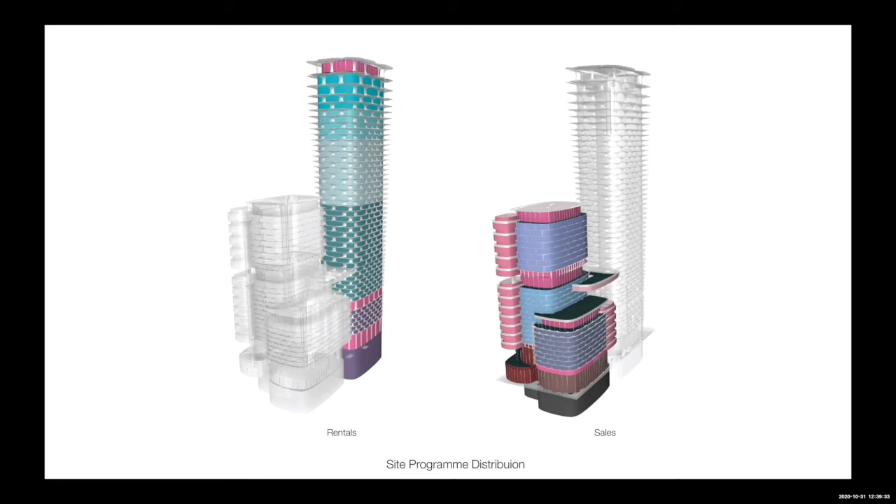We're trying to have more active areas, less sort of seclusion, and so getting people closer to one another in a way where you can activate the social realm is very important. So in the lower area, we're keeping it mostly open, almost to a retail fault on this particular view. But in the upper views that are sort of shared areas where there's constant visual communication between corridors and ground level, where you can have active living from most vantages.

And trying to continue to have a focus on what becomes an amenity, in this case, sort of a jogging deck with a spa area and pool with sort of a central core at the middle, which becomes sort of the umbrella for the topmost part of the tower.

And thinking about accentuating these in the same way that Vishu was talking about the sort of tectonic or the architectural geometry, expressing where the activity is with warmth, in this case, the sort of under canopy of the wood. In the same way, we are doing this methodically from sort of aesthetic and tectonic and geometric aspects.

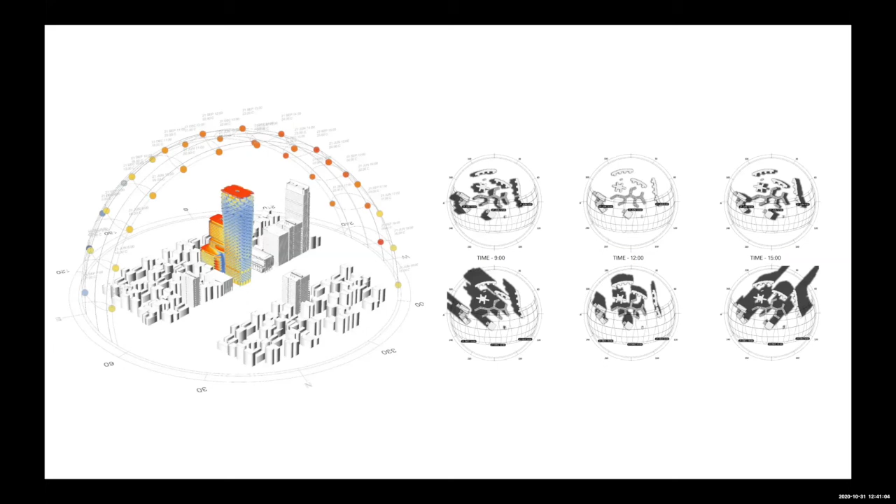We're also evaluating what's in front of us, or saying what are the benchmarks for it, or what feedback can be given. So there is also always some mechanism of analysis that goes along with this. And as Vishu said, with sort of the real-time solar tool that we're working on, there we also continue to garner analytics as we go.

In addition to this, we're building these things parametrically. So this is just to say that these are very lightweight models, lightweight in the computation sense, in that they are built from, in this case on the left, probably a mere 10 faces equals a balcony, which is highly smooth and becomes then variable on a number of conditions.

So one of the themes we are also going to talk about a bit is whether it can be something which is standardized or something which can be bespoke. And housing is driven by efficiency numbers. And this is something that we cannot take for granted, that we have to deal with it very directly.

So the way that you can encode space to be standardized or universalized, and then to have percentages of bespoke or percentages of non-conventional delivery, begins to make it more communicable to others, either in fabrication or delivery, or other partners or collaborators you might need to discuss these things with.

So moving on to sort of thinking about how we do housing on hillsides. This has been a particular challenge that we've had a number of times since this particular competition, where we were looking at how we access units from the top, which is unusual in the sense of, if you traverse down a hillside, how you deal with access in multiple cores and multiple footings, but still retain sort of a promenade.

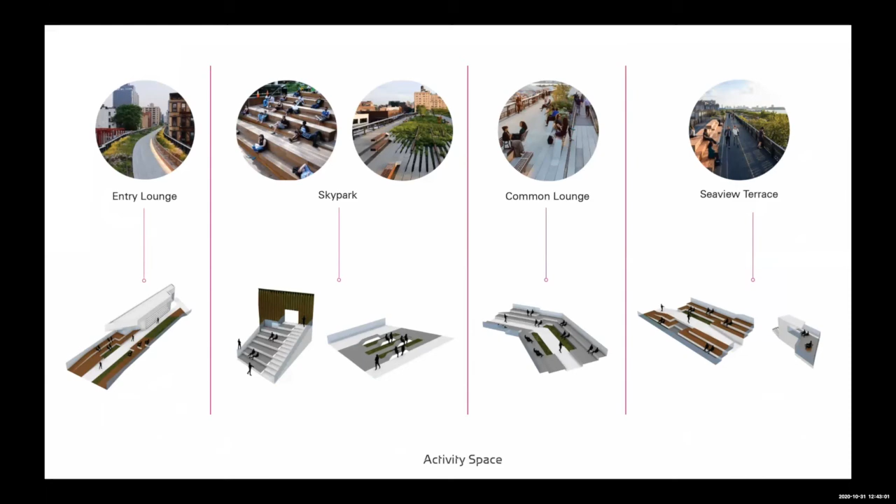But the idea, again, of activating a public way or an amenity thoroughfare, which is an active living space, is what makes this project sort of memorable. And not just that it's 30,000 square feet of student housing, but rather that you can access any given hall from the top. It's a continually connected rooftop terrace with views off onto the bay, and you can drop down into your particular cluster from any given sort of unit on the top.

And this interconnected way has sort of overtones of the High Line and continual vegetated occupation, which is intentional. It's about creating a continuous entryway. So we see here sort of thinking about how we activate the public realm with multiple rooftops, multiple sort of mosaics of ways of thinking about rooftop terracing. Still very conceptual in these stages, but some of the core ideas are still underneath.

This particular project exposed us to thinking about massing very quickly and very sketchy and on a hillside, trying to capture that data numerically, but for optioneering sort of thinking, like how quickly can we think of it if it's courtyards or if it's wings or if it's orthogonal or if it's rounded or if it goes with the contour. So systematically deploying mass on the site and then trying to get the numbers out of it became a challenge. So we're also responding to those internal problems as a team.

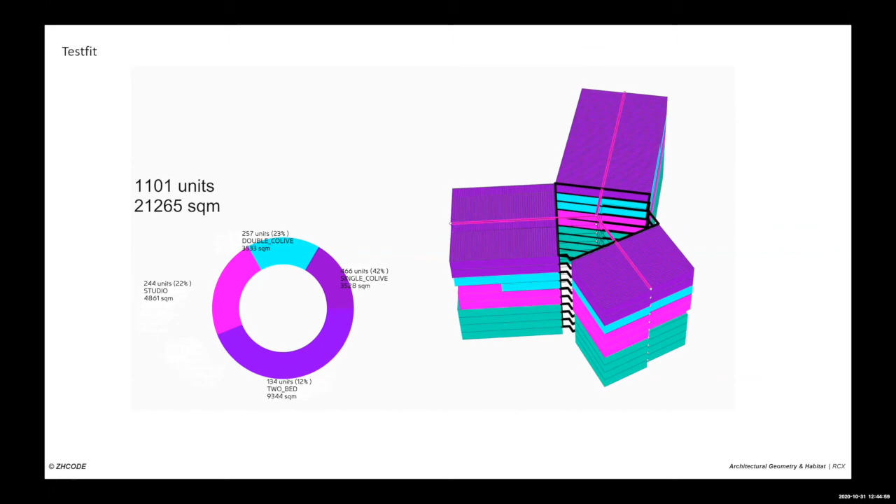So here directly after this project, we're looking at how are we going to test fit capturing large numbers of square meters or large numbers of units in real time so that I don't have to place them manually next time. So, you know, we take on board, we have to do things manually sometimes. It's the best way to do it. To start, we do it analog and we'll get it wrong a few times, but then we'll learn how to make a better digital tool.

Here you see the purple part has units which are pencil thin, but the rest of the tool starts to go in the right direction, that it's not a design tool, but it's rather to get me to a point where I have a credible amount of area and a credible amount of units very quickly for any shape that I can think of. And so this is very helpful to move through options without necessarily having them correct, but if I need to get numbers very quickly, it's a relatively good way to approach the problem.

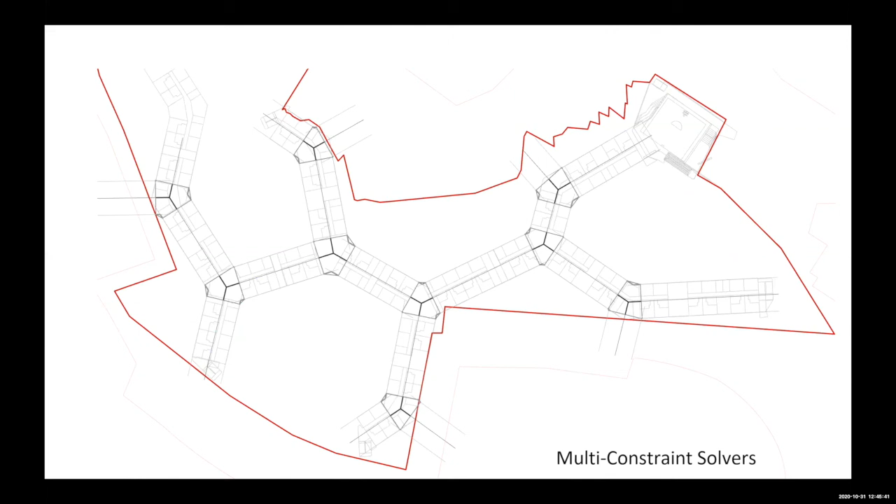Hillside, and in this case, we had a lot of constraints, so I was going to show you some sort of real-time construction optimization that we had to do on the delivery of this project, where with a continuously snaking spine that is interconnected, any move that you make on one of these junctions affects all of the other junctions. So if I move one left, you know, a meter or two, that actually pulls the angles all out of alignment.

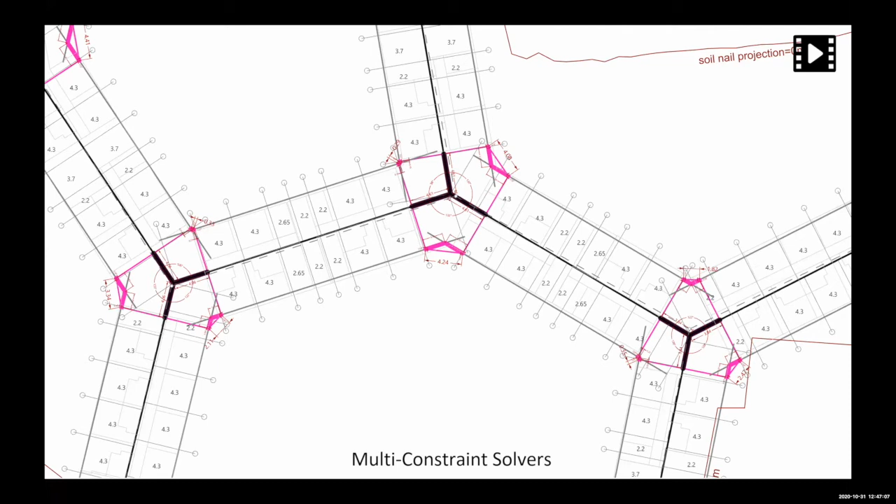So in the end, what we're doing is taking what's on the left, which is a strangely shaped triangle, and then making it the other triangle, and in the middle of all of that, making sure that all of the room spaces remain the same. So a bit of kinematics here and a bit of particle physics, but in effect, this is one of the optimizations that we had to do, which effectively spits out a construction grid set out in the end, which goes out for structural.

But this is not that much different than when Vishu is talking about the Stratasys chair encoding particular color plates or perforations in the chair. We're trying to find ways that data can be represented visually so that you can respond to something about the environment around you as a performance factor. It's not performance in the engineering sense of performance, but it is an articulation of how something can be expressed.

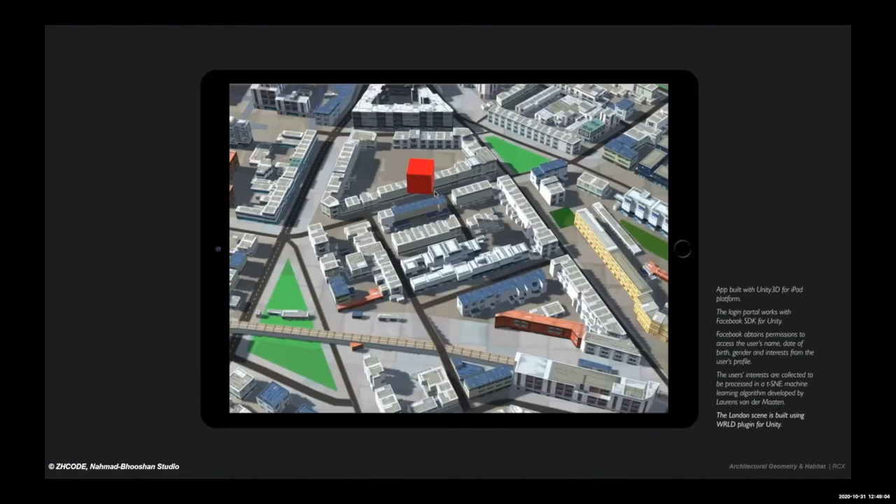We are now more engaged in trying to get more participants involved in the design process, to try and make it an earlier design procedure, to bring more and more people on board early and to engage others in a participatory process where they can build either their community, their particular interior fit out, or how they would want to reside within other clusters as operators. And in the same way you may pick your flights, or order furniture from IKEA, these things we want to bring to you much earlier in the design process.

So we're exploring ways of how we get that variability to different types of users, whether it's the end user who's occupying it, whether it's the operator like a Marriott who wants to just run 100 of these at a time, or whether it's an investor that wants to know that it's a sound judgment call. All of these things we're trying to look at how to discuss those very specific metrics with them all in a round table. So a digital round table of actors, and how do we get all of their opinions to come to the center, is how we will get much closer to having early real-time feedback in thinking about design problems.

And regulatory is an excellent one. How can we encode that in early as well? But other things, and fabricators and engineers and the typical ones that we would interface with as well. If we can get digital participants of them much earlier in the design, then it means we can move faster through a design project.

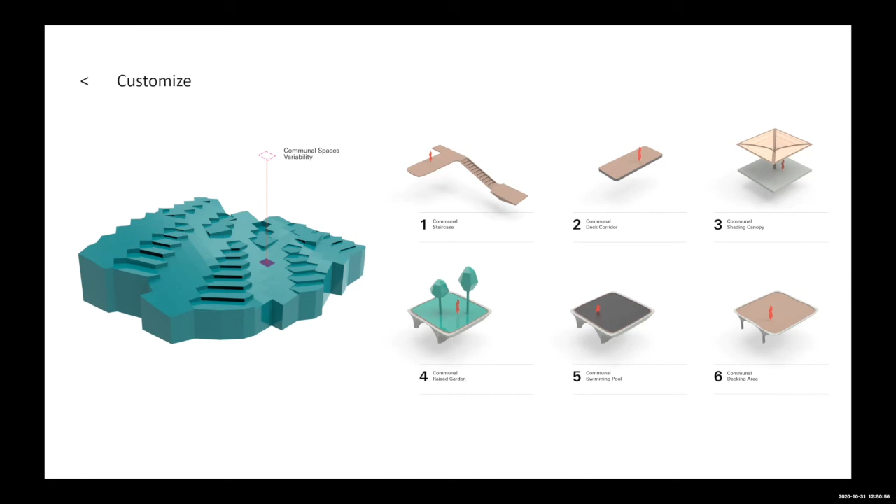So Shajay mentioned we're doing this project in Honduras, and it's very much being done in this way of thinking about participatory housing and how you are able to engage and to choose your particular unit, your particular fit out, or your particular cluster, and how it resides on the hillside, to the extent that if you were an operator, you might choose the different site-wide amenities, or if you are going to buy your own unit, you would be able to pick and choose different options that are available to you on that unit.

And so we're thinking about it in this way, that how can we describe this in a very saleable way that engages the user, but also gives them many options, because this makes it more saleable and more palatable to a broader audience.

Digitally, what we are doing in this particular case is having a number of shape objects that have within them a number of nested shape objects, and those represent what become the envelope and then what becomes the space plan. So the space plan on the inside is sort of a collage of a number of pixels that are then being expressed. And based on the number of pixels that are expressed, we're saying that we might fit them out attuned to a particular persona.

So maybe if you want to entertain people, you would have a larger living room. If you have a family, maybe you would have an extra bedroom or more storage. Or if you were just a young practitioner and all you cared about was having an open floor plate and a lounge chair, these types of things, we're trying to attune design options as styles to individual personas. This makes it actually easier to engage with different audiences because it's no longer a CAD procedure.

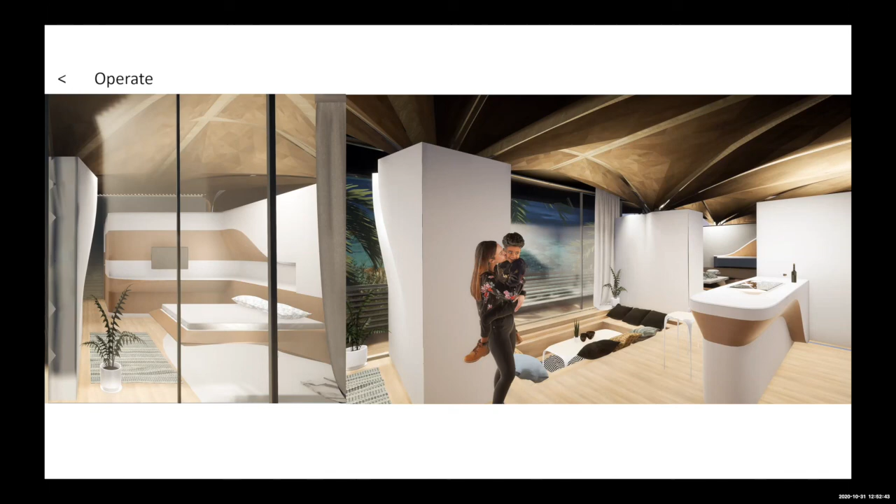We don't have to discuss whether they want the wall to be here or not, but rather we're discussing qualitatively what they would prefer their environment to feel like. So this is starting to look at what the insides would be, very conceptual, but the idea that this has sort of a lounge pit, or that the bed and the storage is built into the wall, and that there's an overarching canopy that sort of does this.

And I mentioned flight seats, and this is one of the ways that we're thinking about how you can actually map or be able to see who is sitting around you, and if you want to build a community around individuals. And we're thinking about this on the cluster side as well, thematically, if you're more attuned to want to go to a gym or a cinema or these things, that individual clusters will have these amenities and be built around this as the identity for that particular set of units.

So exposing transparently what some of those qualities are in a visual and illustrative way so that people are allowed the choice or the freedom to make that choice. If they don't want to, then that's their prerogative, but at least we are exposing data that would otherwise have been lost or not calculated, and it becomes monetizable, which is very important.

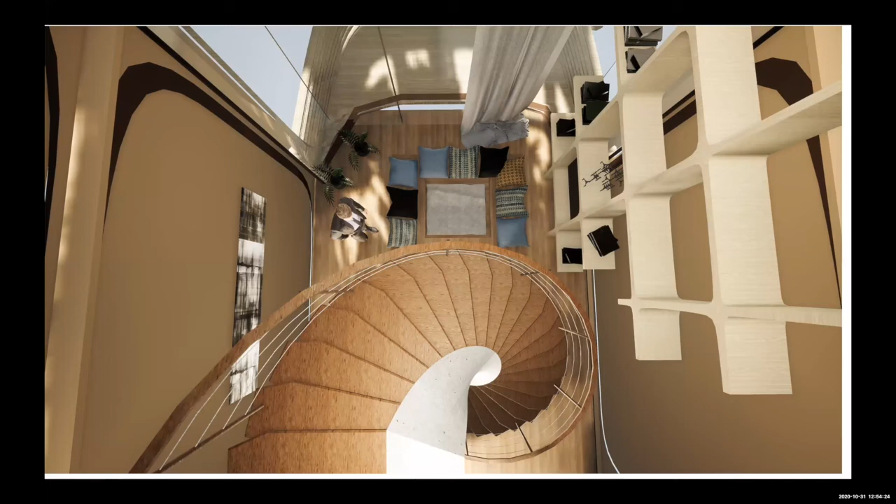If you can find a way to extract data that becomes relevant as a filter, people may want to pay a premium for that. And the client has been very keen on thinking about ways to monetize externalities. Another interior perspective. Yeah, Vishu? We can leave you with a real world example of the configurator.

Yeah, so this is the current state of our configurator where the users can interact and pick their choices, pick the unit they want, the house planning. So it's capturing all of the things we were discussing, right from architectural geometry to computational housing and other performance metrics, which Henry was highlighting. All captured into a gameplay kind of thing, which will include other stakeholders into this framework in the subsequent months.

Yep, so I can leave it at that. I mean, I think this is a good ending slide as well.